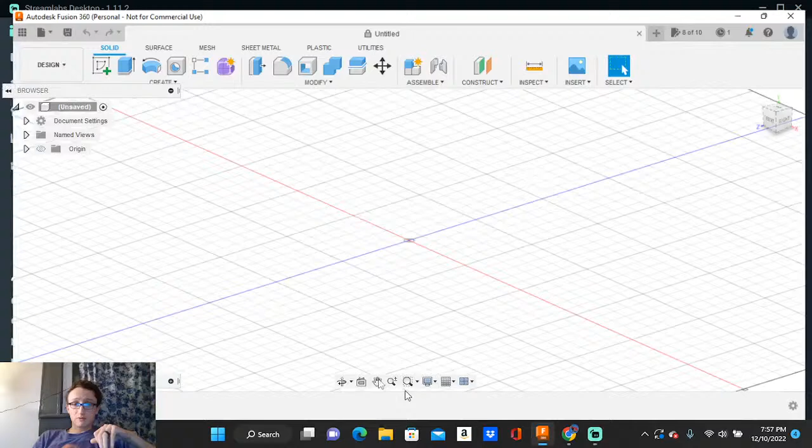We have a fresh file in Fusion, so I can go ahead and start whenever I want. I've got up to 2 more models I can make right now. I went by and closed off a whole bunch of other stuff just because there's a lot of stuff in here I wasn't using right now, so we'll keep that closed and start off with something fresh.

So starting off, I guess we'll go and get some reference images first. Let's look up a Federal Sign and Signal Q2B — let's see if we can find some good reference images.

Of course, everyone knows what a Q2B looks like, but we'll go off of this pretty much. There's going to be some design constraints that are a bit different, just basically inherent with the size of the siren I'm making.

I typically try to make my rotors about the same size. They're pretty much all the same size, with the exception of the Model 7T, which uses a smaller rotor than I usually do. But most of my rotors are around 40 to 50 millimeters in diameter, so we'll probably make this siren have about the same size rotor.

So the rotor's going to be about 40 millimeters, which, if you want to see what that looks like, I'll open up my calipers really quick and give you a visual. So there's 40 millimeters right there. That probably won't come through very well on camera since the screen you're looking at is so tiny, but there's 40 millimeters, that's my hand, about the size of a palm of your hand. So it's going to be relatively small, at least compared to the full-size version.

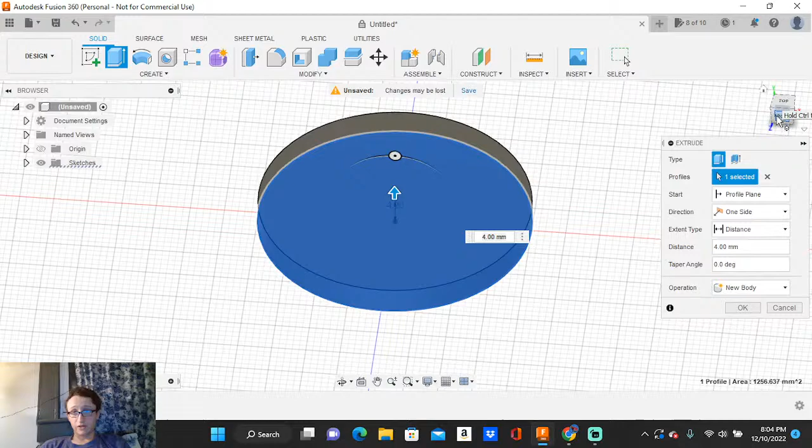So 40 millimeters right here. I guess we're just going to make this like a simple plate right now, so let's make this a quick little plate. 4 millimeters — that is really thick, I don't want it to be that thick. I mean, it might have to be just a little thinner.

I want a generally thicker rotor than what I'm used to doing, because I want the rotor to have some amount of weight to it, so that once the motor disengages it'll keep free spinning. I've got an idea of how I'm going to do that — I've got these really tiny ball bearings, probably won't come up very well on camera, but these are super tiny little ball bearings.

These were actually what I used on the miniature Chrysler — those are the bearings supporting the entire rotor and compressor section. So we'll do that. 40 millimeters seems to be about the size I want to go with, so we'll try that first, just so we generally know the shape we're working with.

Let me go ahead and make the walls of this. So 40 millimeters — we're going to make the wall thickness maybe about 2 millimeters thick for the rotor itself. We'll go in here, just come off, so 38 — this gives us our 2 millimeter wall thickness. Go up just like that.

Now the Q2B has a pretty decently deep rotor, so let's see if we can find a better picture of the side. There's a side profile of it, so it's got a decently thick rotor. This is not by any means a speed run, but I definitely want to try to do this as relatively quickly as I can, because I don't want to be sitting here for 4 hours designing this thing.

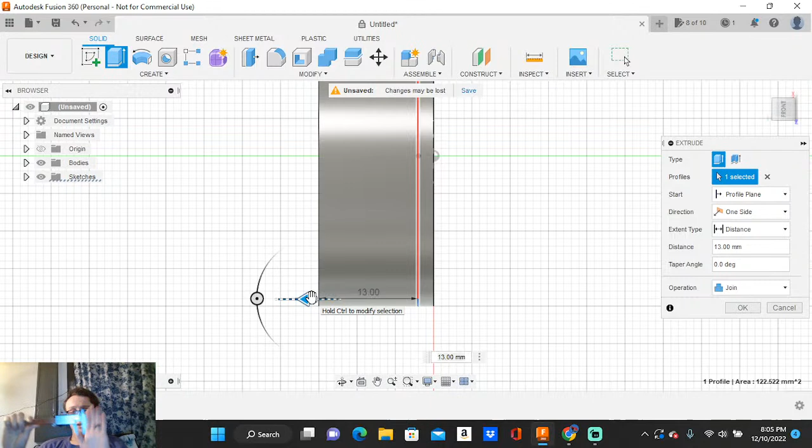Now 13 millimeters seems a little small, so we're going to do, I don't know, about 17. Well, 17 looks too big now. We'll do like 16 — oh man, that's going to be a real small siren. If I could make it 20 I would like to do it as 20. You know what, no, we're going to do 18. That'll be thick enough.

Alright, and again, as I said, I did make the walls of this just a little bit thicker than I would normally do, because I want to make sure this is going to have enough weight to keep coasting once it's done.

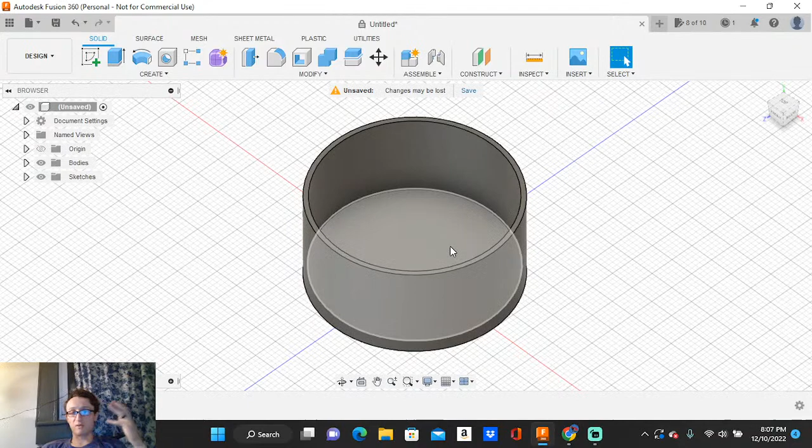The one thing that's going to be kind of a pain is because of how small this clutch has to be in order to fit within the siren, and also to be detailed enough to physically work, because I have to deal with the size constraints of what my printer can actually print. This is 40 millimeters for rotor sizes, and anything smaller in functional parts gets close to the edge of what my printer can print with relative detail. So I'm going to try to make this whole siren MSLA printed, using my liquid resin printer, not hard plastic filament, which can get a lot more detail. So we're working with that constraint, and I can probably get away with making things a little small, but I have to keep my tolerances realistic.

Chat is blowing up. My gosh, I got 8 viewers right now. That is crazy.

Let's see, Abel - I don't know how to spell it, but you're alright dude, you're alright. Sirens and fire alarms in Northern Florida - I make mini, sorry, mistype, Abel won. Bro, Morocco lost to Portugal. I didn't see that yet, I haven't seen the game.

Cool Sirens 1000T says, I'm going to watch your lives because I want to learn how to make these scale sirens. Of course man, that's what they're all here for.

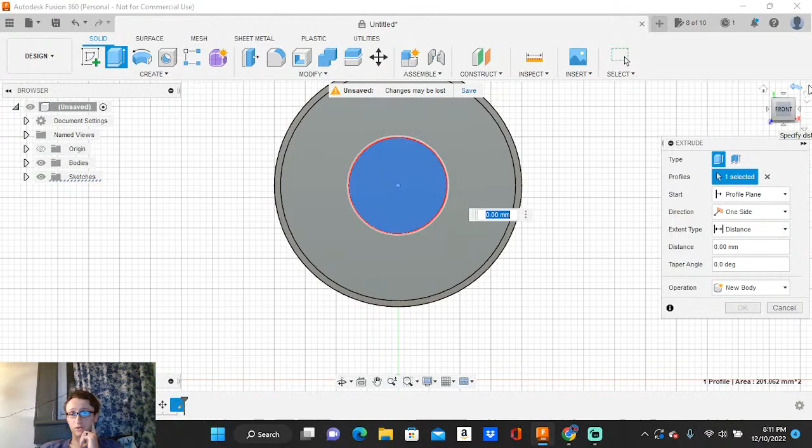Let's make this about, it's way too big. I don't need that to be that deep. Let's do 13 to make sure I have enough space.

Because these two bearings, I have to use two of these because of the lateral play in the bearing. Lateral play means, say if I have an axle going through this small bearing, let's say my fingers are the bearing and this is the axle. The bearing has lateral play, meaning the actual bearing itself can twist up to, I think, about 10 degrees in either direction because of how small the bearing is. They're just not made to super high tolerance because they're already so small. I have to account for that, so I can't use just one bearing, because the weight of the rotor, once it's actually inside that stator, is going to cause the whole rotor to sag on that bearing because of the bearing's play. So I'm going to have to double up the bearings, two of them side by side, and that will cancel out their play so it'll be nice and tight, making sure that rotor stays centered in the stator so it doesn't end up scraping, because especially at the scale I'm at, the tolerance between the rotor and stator is already going to be tight enough. I don't want to risk having the thing not actually lined up properly.

Speaking of which, there's a fire truck in the background.

That's because I live in between two fire stations. That's probably why you hear it so much. You can hear it in a couple of my other videos.

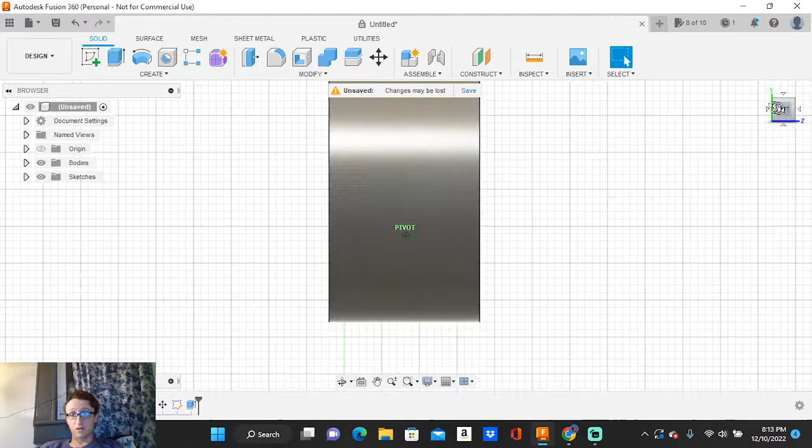I want to do a section analysis really quick so I can see where I'm at. Let's cut, I don't have a face to work off of, let's do that one. Alright, so I can get an idea of where I'm at. I have to try to find a way to fit that clutch into just this little space, which is going to be a real drag.

These bearings themselves, let me get a quick measurement, because this is why it's important to have a pair of calipers to know the dimensions of the stuff you're making, if you're using parts that aren't 3D printed. So my bearings themselves are 4 millimeters tall by...

There's no way that's 8 millimeters. Let me re-zero my calipers. Yeah, that's what I thought. Oh no, they are, okay, yeah, they're 8 millimeters. So 4 millimeters by 8 millimeters.

Okay, so 8 millimeters around, so we can go into here. We're going to hollow this out so I can make a space for the bearings. So this is 8 millimeters around. If I did exactly 8 millimeters, knowing the way this printer prints, that would be way too tight, they're not going to fit down there. In a perfect world, if I could print exactly to 8 millimeters, that level of precision, it'd be no problem. But the printer has its own tolerance, its own resolution, so I have to account for that.

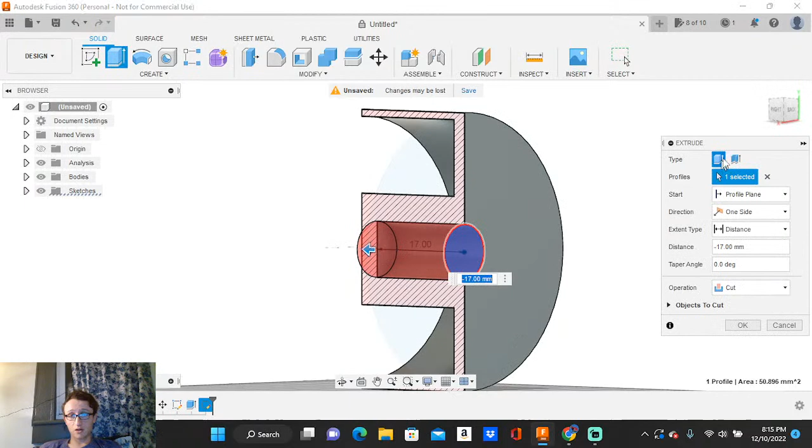It's probably going to be a little tight trying to squeeze the bearing down there. But I can make a press, like a little punch that I can print to actually force the bearing down this rotor. So we're just going to do that. I'm going to say that's probably going to be pretty good. So let's go ahead and force that all the way up to the front, make sure I have enough space to fit this bearing in there.

Let's make it, that'll be fine. That'll be fine. It doesn't have to be super precise. So it's a 1 millimeter wall right there, so we're going to cut that. So now that means this wall right here is 1 millimeter. Now remember, these two bearings doubled up.

I can also just make a model of like a dummy bearing to kind of give me an idea of how big it's going to be, give me an idea of what kind of space I have to play with. These two bearings doubled up are 8 millimeters.

So okay, let's just say I'll make another little sketch. We'll say that this right here, this circle, I'll make exactly 8 millimeters, and then make it 8 millimeters tall, because that's what the bearings are when they're doubled together. Go in here, add that dimension.

So let's say this right here is the bearings. So I have all of this space behind those to try to make the clutch. And that's the yikes part. That's going to be the really hard part.

So we're not going to join that, we're going to keep it as like a new body. We'll go in here and we'll start labeling stuff. So my body's over here, body 1, which is the rotor itself. We'll go in here, we'll just rename this. We'll call this the rotor.

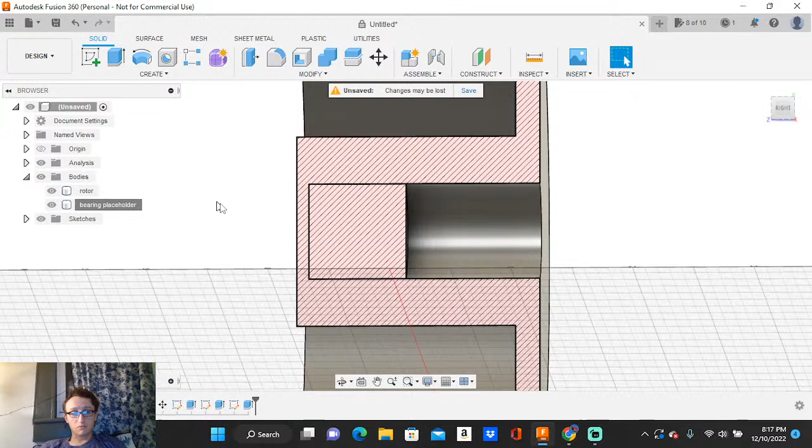And these right here, this is basically going to be a placeholder, so we'll call it placeholder. Or we'll call it a bearing placeholder, why not? Okay, so that's going to be a bearing placeholder. So then when I actually model this, that'll just keep it labeled there, so I know this is actually not part of the model, so that I can just go there and delete that. It's just so that this is basically a guide, so I know kind of where I'm going to be situated.

Go ahead and go back to the chat really quick. I'm going to try to read some stuff really quickly. Long Beach has Screenmasters, I saw that already. Sirens and Fire Alarms in Northern Florida. Screenmasters also in San Jose. Yep. The Ray 2009 in general. What is your favorite siren?

Man, you really put me on the spot there. My favorite siren, I like a lot of them. I know everyone's... I think a lot of people in the community, I think they're immediately gonna be like, 'Oh, I like Thunderbolts,' and I get that. Because Thunderbolts are a pretty unique siren. They're a really interesting one. But...

I still think it's probably gonna be either like Model Ds. I've always loved Model Ds. I know they're pretty popular. I mean, they're not super popular, but they're a pretty easy siren to get. But I've always loved Model Ds. So I'd say probably Model Ds, but I'd say second to Model Ds...

And really at kind of the point of being a real contender for my top siren, I would say is probably the 500s, probably the 500 SHTTs, specifically the very early ones. So like the 1950s models that you see in LA. I think those are probably one of my favorite ones. They're really up there for me.

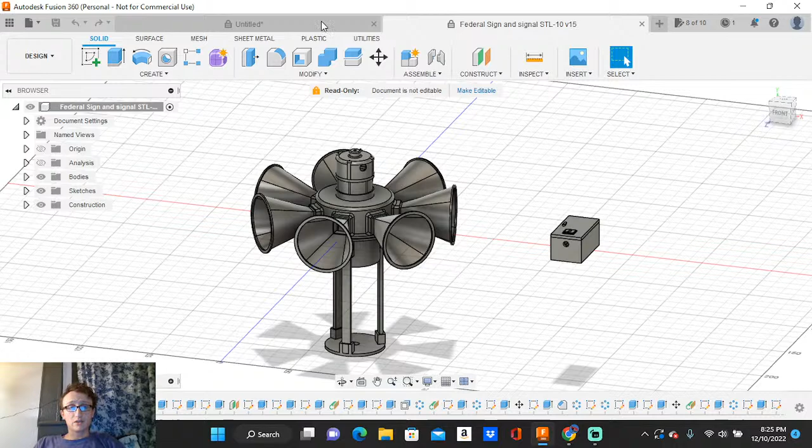So today I'm modeling one of these. I'm trying to keep it in that same scale, so it's trying to be really, really small. And of course I have the real ones too, not just little models. They're all stacked up over there, but I'm not going to show you my house, it's kind of a mess right now. But yeah, that's pretty much what's going on in the stream. So if you like 3D modeling or want to learn how to do some of this stuff, stick around, or just enjoy.

AJ, he's modeling a miniature Federal Q. Bitfinesse, Federal Q siren, AJ? Yes, a Federal Q. Every American fire truck siren now, at least. You might be getting a Model 2 from a fire department. Congrats, that's cool. Is it a 240 or a 120? It's probably gonna be 240 if it's from a fire department.

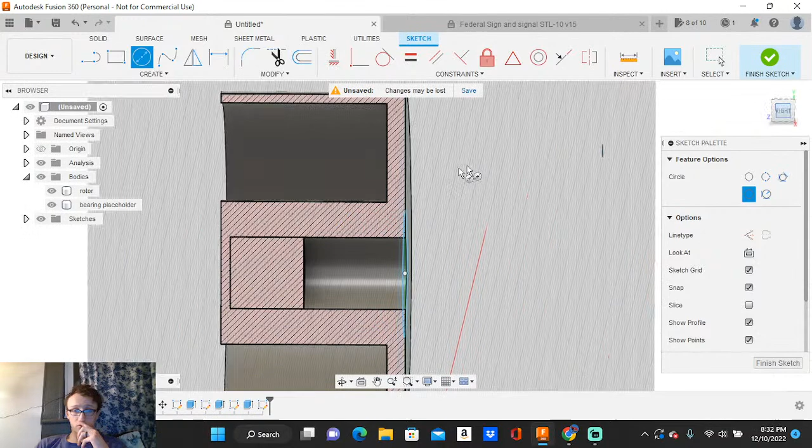So I think 2 millimeters, actually even 2 millimeters is too thin. It's way too small. Let's make it a little bit bigger than that. Let's go, I don't know, let's give it at least 3 millimeters. We'll give it at least an extra millimeter there.

So we know that's about 16 millimeters there, so we'll just do 13. We'll cut down to 13 there, go in here. We're going to cut out this ring, basically almost right up to the bearings, I think. So we're going to cut it about that deep, because I want to make sure I have enough space in there.

And I will have to put a spacer in between these bearings to keep the actual rotating section of the clutch off of the bearings, because I don't want it to rub against this.

So, you know what? No, you know what? Let's go flush with the bearings. Let's go flush with the bearings. So this is all the space I have in here to try to model a clutch.

You know what? Since we're here, let's get rid of the rotor. Let's also go ahead and cut the hole for the bearings, just so I remember what size it was. I think these are like 3 millimeters inner diameter for the bearing. Let me check my calipers again really quick. Yeah, 2.93, so that's within tolerance. They're 3 millimeters. So we'll just say this is 2.93, so 3. I want to make sure I'm staying within tolerance.

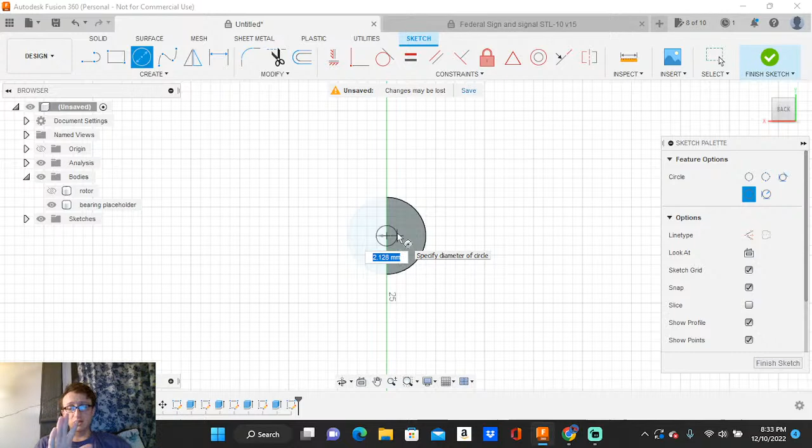I gotta make them a little bit bigger. No, I don't. No, this can be an exact tolerance, because this is fake. This is pie in the sky woo-woo magic if everything was perfect, because everything is dimensionally modeled perfect in Fusion.

It's only when you bring it into the real world that you realize the real world is out of tolerance all the time. So let's go ahead and cut those holes for this bearing. Let's just say that's the bearing right there.

Go ahead and do an offset plane. Cut it halfway through, so they're 4 millimeters deep. We'll do it so it looks more like 2 actual bearings and not just this little space. So let's say that about that.

Go here, split this - splitting tool, this face. There we go. All right, and now I gotta make sure that goes away, because that's right where I don't want it. So make sure that plane goes away.

All right, so now I have our 2 bearings, so we can kind of get a bit of a better visual as to where these things actually are sitting. So now this is the part that I'm going to be kind of interested in how I'm going to do it.

Again, let me go and kind of describe what I'm talking about here. So let's do a pawl clutch...

And see if we can find one. Paul Clinton, that's fun. Or Paul George. No, I'm not looking at that. I guess Paul clutch - that's not who I'm looking for. Oh, I'm an idiot, I spelled pawl wrong. There we go, there's a pawl clutch. I spelled pawl like the dude Paul.

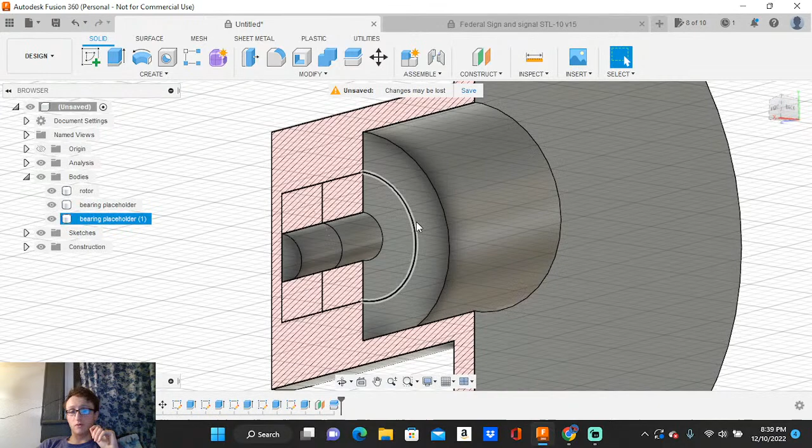Okay, so we're going to try to fit all of that in here. Let's see if we can do that. Now, I'm not going to bother trying to model the rest of the rotor. That's all pretty easy stuff, I've done that a thousand times before. That's not the hard part here. The hard part is getting this clutch small enough to fit in this little tiny space, and making it durable enough to last specifically for customers, people that are going to be purchasing this.

Shout me out on my basketball skill. Yeah, for those who are wondering, Able Wrestler 1 is my younger brother, and he's a basketball player playing in middle school. I'm hoping I can get to see one of his games when I go back to California. But yeah, this is basically a brief little look at that. So we kind of know what we're going to be working with.

So let's see if we can do it. I don't want to actually be constructing this inside this right now, so let's go ahead - this is going to be in my way as I'm trying to model this. So let's go ahead and make an offset plane, put a plane right there so I've got something else to build on. And then let's get rid of all of this noise here, so we have a nice clean slate to build on.

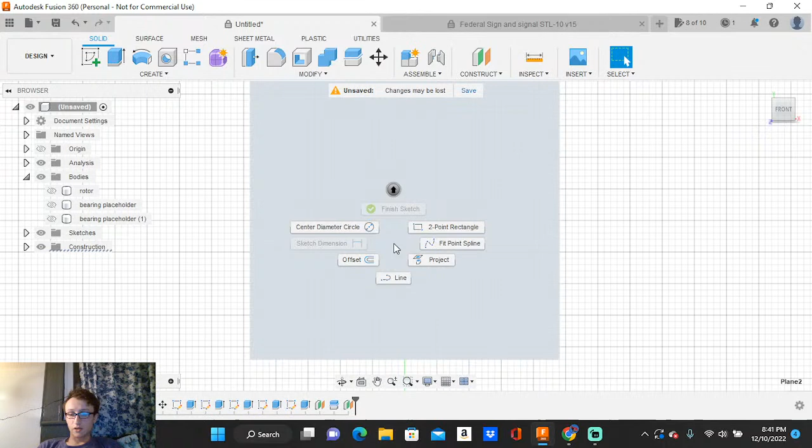So I guess we'll start with the clutch, how we're going to do this. So these motors rotate clockwise from the shaft end, so let's take that into consideration. We're going to put our little circle here. Let me make sure this lines up with the rotor - does it, right, make sure it's concentric. Yes it does. Alright, so I don't have a lot of space in here. Let me bring back the rotor.

Yeah, let me do another section analysis really quick, actually. Go away, man, I don't want this. Go away, sketch, thank you. Okay, let's do another quick little section analysis. I'm just going to finish this sketch, just so I can see kind of where I'm at.

How much space do I have? Yeah, let's do that. So I'll do another section analysis, just to get an idea where I'm at. You might hear my cats screwing around in the background, just be aware.

We went ahead and put a construction plane, so I've got something else to build off of. Let's start trying to make the actual clutch itself. I want to make sure there's enough space for the pawls to fly out and actually grab the rotor, but also close enough that they don't continue to rub.

I think 11 millimeters. The inside of this is 13 millimeters. If I make the wall, the actual pawl itself, 2 millimeters deep, that gives 10 millimeters. 10 seems a little small, but it might work, giving plenty of space for the pawls to fly out. It's just a 1 millimeter difference, but it makes all the difference once you get later down the road in the model.

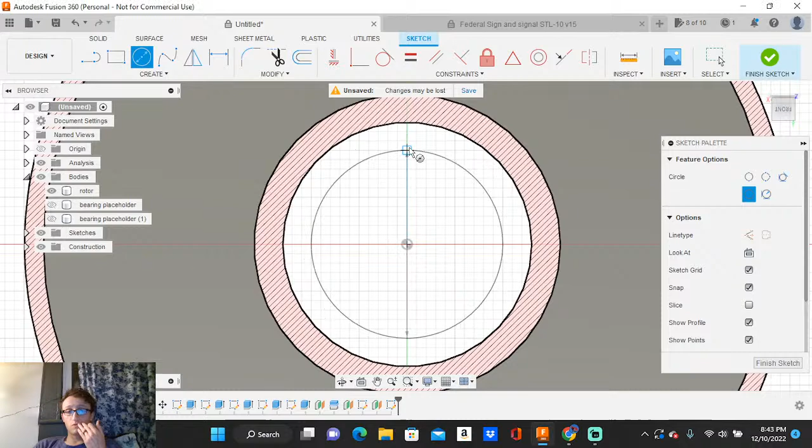I'm going to go with 10 millimeters. That leaves quite a bit of open space inside there, but we'll deal with it. Okay, so 10 millimeters there.

Let's go ahead and give this some volume here. Let me get rid of that section analysis because I don't want to see through the whole thing, but I do want to see through the other side, and we'll see how deep we make this. It's going to be kind of a deep clutch. Add our bearings back so I can see where I'm at. I think that's pretty good.

We'll get a little closer to the bearings. I'm going to put a little lip on the actual rod that comes out and holds onto these bearings, to make sure the whole thing stays off of this face, so that the spindle of the clutch doesn't keep rubbing on the actual rotor itself.

So there's about half a millimeter there, we'll leave that as is. Then we'll come back inside and add the little pin that's going to hold onto those bearings. Now it went away, so I can't see it. There we go. And how big were those bearings? Those were 3 millimeter inside diameter.

The clutch itself is probably going to have to be printed out of PETG. Those are wailing sirens in the background, the cop cars. So this is going to be PETG printed. I want to use PETG for this because it's more flexible than resin, and I know it'll be able to flex out there and make contact. So let's use PETG for this.

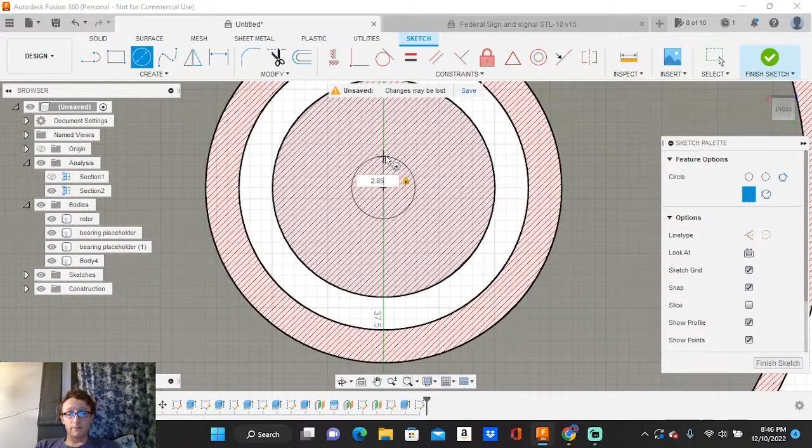I have to remember that the PETG tolerance is a bit different. PETG tolerance, I think, for this kind of stuff is usually about 0.15 millimeters over whatever size is measured, while MSLA is 0.5. So if this is 3 millimeters, I have to go 0.15 millimeters in from that, so 2.85. Make the shaft 2.85, which should be the perfect tolerance to fit.

Oh, hold on, I have to do this first. I have to make that little lip I was just talking about. So we'll come back in, go off of this, sketch that circle again, and make it just a little bit larger, just to keep it off. So 3 millimeters, let's make it 4.

So 4 millimeters there. Come up off of that half a mil, because that's the size we're using, which gets us right up against that. I know it looks bad, but trust me, it'll work. We do not want to join those together. Make sure you pay attention to that kind of stuff, because Fusion will go ahead and weld stuff together if you're not paying attention, and it'll screw you later on.

So we'll make that size, get a little bit of a lip, then make this center section again. Get my analysis back. We're going to make that 2.85. That's 2.86, you moron. Go back. There we go. Alright, so now we can pull that sketch out, get rid of our section analysis, and get the section analysis back.

This is going to be the pin that slides onto those bearings to actually hold it on. I don't want it to go all the way to the end, because if it does, it's going to hit the front cap of the stator or the rotor. I might also add a little hole on one of these sides so you can get in there and oil the bearing if you ever have to. But we'll just join that together now.

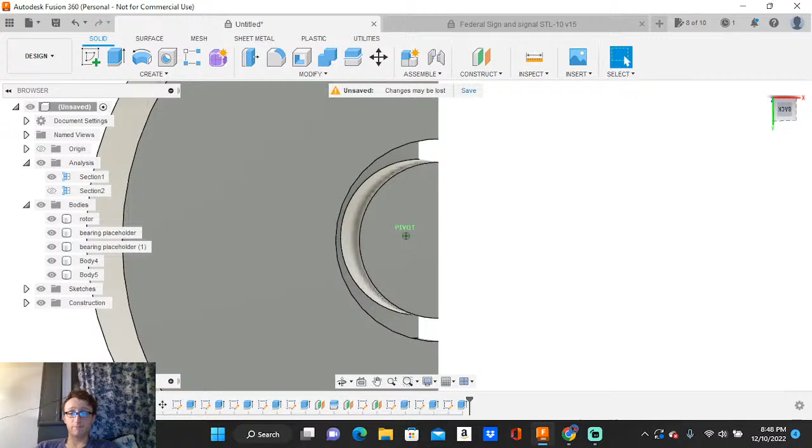So now we have essentially the root of the clutch. Alright, so now this is going to be the hard part, which is how the hell am I going to make this?

Let's get rid of these bearings, get rid of the bearing placeholders. I don't need the section analysis now, so get rid of that. Here's the drum, this is basically going to hold all of it. Why is my STL-10 still here? Get rid of that. We're going to make this drum, so let's see how we're going to do this.

Because this motor spins pretty fast. These are the motors I use, they're RM130 motors. If you want to look up what size they are, they're little RM130s, and at 5 volts they spin at like 9,000 RPM or something insane. Yeah, I think it's 9,000 RPM. They're quick little bastards, but we'll go from there.

So the center hub of this, since I know the motor shaft is a 2mm shaft, so 2.15 - don't ask me how I remember that, I just do. That's the tolerance I know I have to work with when making FDM stuff. I'm going to add that back so I can see how deep I make this hole, and then I've got to measure how deep the motor shaft is.

And the motor shaft is - wow, there's a lot going on Main Street right now - motor shaft is about 7mm, yeah, about 7mm.

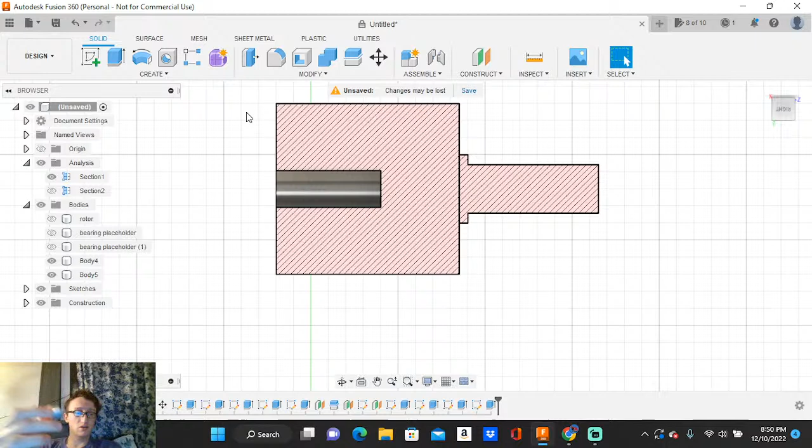Am I still bleeding? Man, I don't know what I did to myself. I must have caught myself on something.

So make that 6mm. This whole thing is going to be kind of dangling off of the front of this motor, so I have to be very careful to make sure this is centered correctly. I might even have to make this MSLA printed just for it to work properly, which I don't want to do, but I just might have to.

Alright, so this is going to be kind of just a freehand thing, so let's see what I can do. Let's start out with doing some fit point splines, let's do some splines here. Actually, I want to set up some kind of barrier here - let's go from that center point down to the bottom edge, just so I have some kind of compass rose lines here, so I can have some very accurate places. I have to make sure this thing is balanced, it's going to be spinning so freaking fast, so let's make sure we've got some points here to work with. Let's say about right there, that's fine.

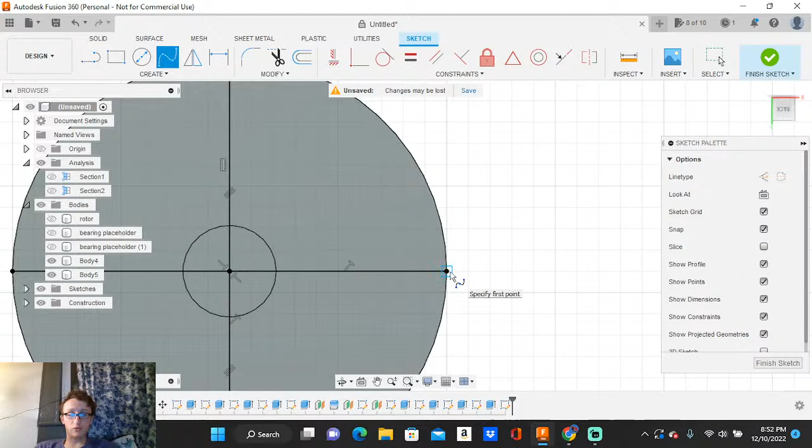So I have to make this section down here kind of thin. Apologize guys, give me a second to figure out how I'm gonna do this, because I've got a lot of space. I got a gap too. There's a lot of space I gotta worry about. Yeah, that's a lot of space to deal with.

Because there's the actual rotor itself right there. I can add the poles to the rotor, no problem, that's not the hard part. The hard part's just making this clutch kind of work.

Now I want to make the inside of this reasonably thin, but I want these to be long enough that they're gonna want to fly out when the motor gets spinning really fast. So let's try to make this structure right here off of this one line. We'll go, I don't know, like half a mil in.

Yeah, about half a millimeter in. So that gives us a point we can actually base off of right there. And then we'll go up from there just a little bit, just to give it something to work off of. This is going to be a lot of the fine tuning kind of stuff here.

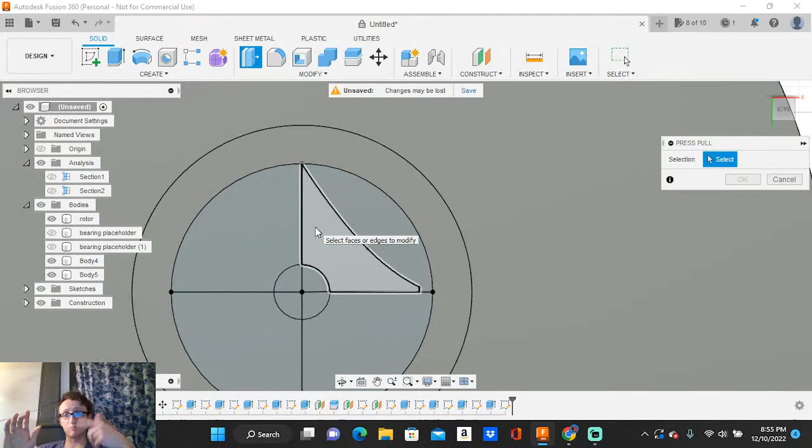And I do want to keep the actual rotating mass of the clutch itself kind of low, because I want it to slow down once I cut power to it, so that it lets go. So I don't want this to keep spinning and keeping those pawls out, because then it'll stay engaged. So I want to make sure this doesn't stay like that.

So let's go ahead and add another fit point spline. We'll add this spline just a little bit lower, basically to cut this section out. Just give me a little bit of a gap here. Let's just do right there. Yeah, and then it'll bend away from that as I move.

Sweet, how big did I make that? I made that like a 1 millimeter square, or a half mil. So from there, we'll go right there. Yeah, and then we'll draw a line and connect that to there, so that I can cut this little section out now, and that'll give me one of the little pawls. So if I go here, go in, press pull, I can now cut that section out.

So I basically have the edge of the pawl now. The problem is that gap might not be big enough. When this printer prints, you have to worry about the tolerance of the printer, and this is going to be printed using the FDM printer. So this is the hot molten plastic, and when it's laid down as the first layer on the bed, it tends to flow out. It creates what's called an elephant foot, it's just known in the 3D printing industry. That elephant's foot is going to end up closing up that little tolerance I just created, unless I make sure this is actually wide enough to compensate for it, to make sure it's not going to scrape on anything or basically weld the whole entire thing shut. So I might have to make that a little bit bigger.

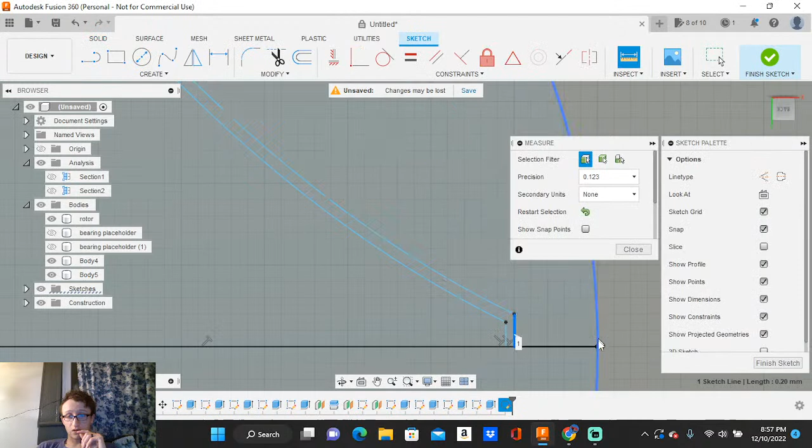I want to pull it out first and just see what it looks like. And I think that even that's probably still too thick. Let's see how thick this is exactly from edge to edge. Half a millimeter. I mean, doesn't seem that thick, but even looking at it, it looks really thick. Let's do half a millimeter, see how big that is. That might work, actually. That's pretty thin, but it might work.

Alright, I'm going to have to cut a little relief edge here, about like this, just to make sure this is actually going to have enough room to have a point to flex on. So that is really, really small, but we'll see if that's going to work.

How far is this edge from itself? Ooh, that is really tiny. That's probably going to be way too small. It's 0.2 - wow, that is so small I can't even see it in the calipers. That's okay, that's way too small, so we can't do that. That's not big enough of a relief edge or open space.

So we're gonna have to make that a little bit bigger than that. That's no problem, I just showed you how I did it. So I was gonna go back in here to find fit point spline again. It would probably help if I actually gave myself some lines to work with. So we can do about half a mil again - do 0.5, so make half a mil of a gap. My printer should be able to print that, so that should be no problem.

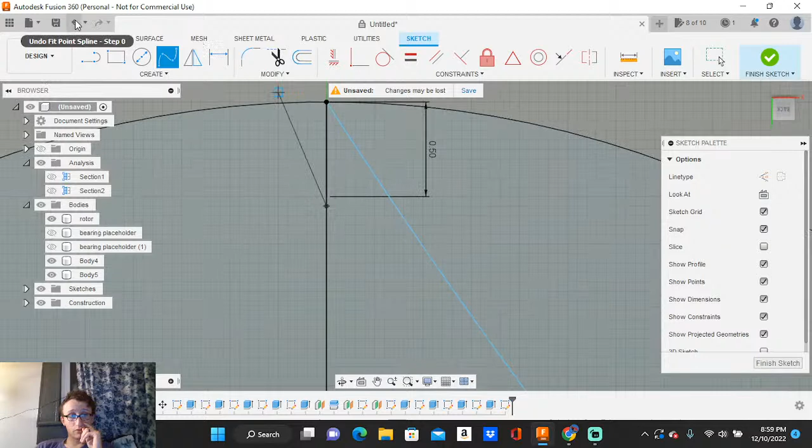So half a mil there. Where's my little guideline I just made? There's the square - no wait, no, that was not the square I was on. There you are, okay, so we're going to do that. Come down, how big is that? That's about 1, 2, 3, 4, 5 squares. 3, 4, 5, right there.

That doesn't look right, that doesn't look right at all. Maybe it is, I mean, in other words, it doesn't have to be perfect. So we'll just say it's that, whatever. That will at least give us some kind of space on here. Yeah, that'll give us some space. Let's say right there, why not?

Okay, so now can I cut this out? Sweet, okay, I can now. I do have to make that relief edge again, so I have to continue on with that. I wasn't done, because when I backed up to fix what I just messed up, I ended up creating another problem. So we'll make this go down about another half a mil, just to give us a bit more space for this whole thing to flex on.

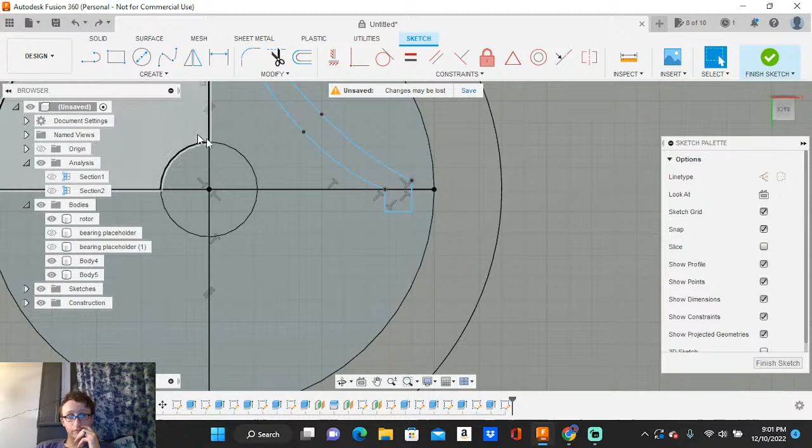And that pawl is pretty sharp on the other edge, which is perfect, so that's what we want. I might have to make that even longer. I have to make sure this is going to be flexible enough to actually open, because if this plastic is too strong, it doesn't matter how fast I get the motor spinning - the centrifugal force is not going to be strong enough to make this whole section actually fly out and reach the edge. So I might have to make this a pretty long relief angle, or little relief area here.

What are you doing? There we go. So let's make that generously long enough so that this should work. God, I hope that does. That's going to be a lot hinging on that one little spot down there, but that should be pretty good.

So now we'll go - where did you go away? There you go. Now I'm at the point where I'm just kind of talking to myself, so bear with me for a sec. Make sure that goes away, and then I should be able to go along and actually cut that entire edge out, if I cut just like that. Why are you still connected at the top? I didn't want you to do that.

Now I'm just kind of making myself angry. I want you to be open at the top. Why were you not open? I'll just make a little thing here, this will be pretty quick, just so it's open right there.

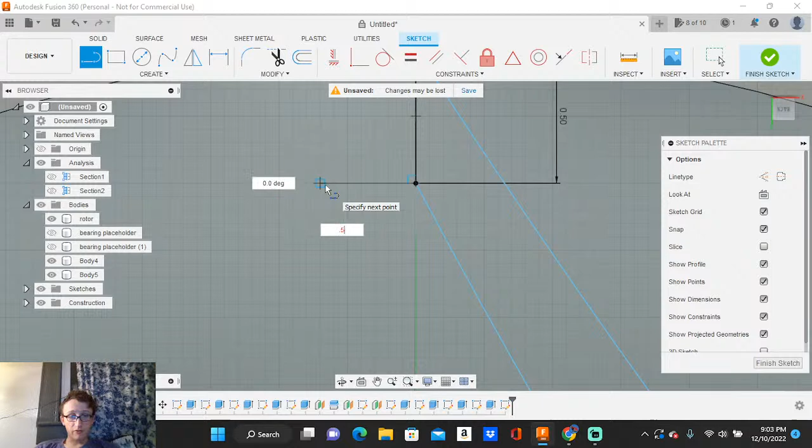Make it go over... whoa, not 5 millimeters. Not 5, 0.5. No, let's make sure we do that again. 0.5. Thank you, okay, go back to that edge.

Alright, so now when I press this out, I'll make sure I actually press that out too so it won't be joined. Man, what is going on Main Street right now? There we go.

Should be able to cut that whole thing out, and now we'll have the space. So we'll cut that. That looks pretty good, but it would be unbalanced at this point. So this is where we have to go in, and we will do my favorite thing, because it feels like a cheat, to be honest.

Go to our section analysis, and I should be able to highlight that whole entire thing, kind of, and then just select an axis, and then it will basically, whoa, we're not adding 10, we're not adding 9, we're doing maybe 4, if I can get lucky.

I don't think I am. I think even 3 would kind of be pushing it. Let's see what it looks like with 3. That could work. That might work, actually.

That keeps it really light. There's not a lot of mass in here, which is good. So it keeps that whole thing pretty light. I could honestly even come in here and actually cut some holes and make this even lighter than that, because again, we want this whole clutch section to be as light as possible, because we don't want it to stay engaged.

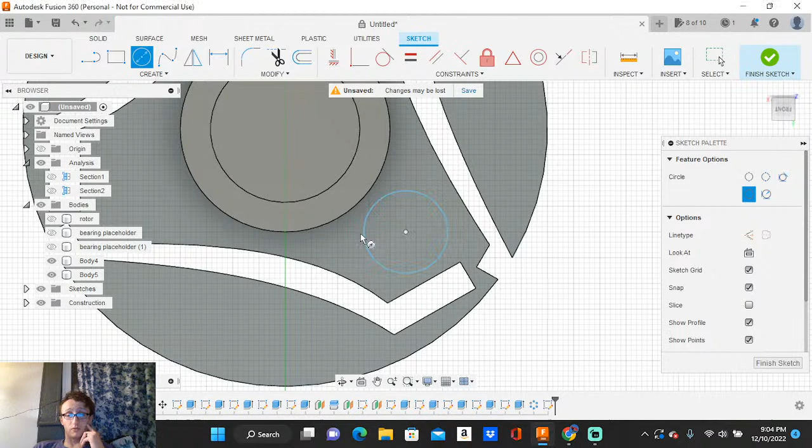So I can see if I can go in here and cut just a little hole. Yeah, sweet. I mean, it's like 1 millimeter, but it's weight reduction. So we'll cut one little hole, let's see how that works.

Along that edge, cut that. Now, am I going to like that, or is that going to end up biting me later on when I find out that this is too out of my tolerance?

And do the circular pattern again, come back in here, select that hole, go into axis, just select—I'm not doing 8 of them, or 10 of them, let's do 3, like it was before. So 3 of those. There we go, and there is the center of our clutch with the included weight reduction holes.

Try to keep the weight down again. That looks pretty good.

I'm not too fond of compliant mechanisms in 3D prints because they typically don't work very well. Again, because of cycle life, they don't like to be cycled very frequently, and I'm kind of concerned that this is a really close gap right here. That's really close. I don't think the printer can even model that.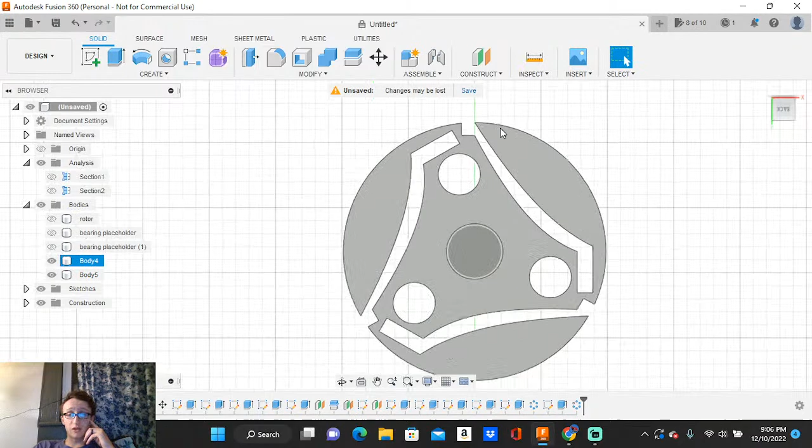Yeah, how far is that? 0.2. I don't think it can even model that. But you know what we can do? Because of the magic of having a 3D printer and having the software to do it, I can come in here and we'll check really quick and see if this is even going to match up.

So I'm going to select this, select 3D print so I can actually see what it does. Why isn't this connected? Why aren't you connected? For some reason, the actual support for the bearing wasn't actually tied into the... there we go, that was dumb.

Alright, so now I can take the whole thing. Let's go ahead and export this. Let's just do—this is another thing I'm working on right now. Let's do clutch, I'll find it again later, but let's go out here. There's a compliant mechanism. And there's Streamlabs.

Wow, I've been doing this for an hour already.

Alright, let's see if I can—we're going to read some of the chat really quick. There's a lot kind of going on. My throat is so screwed up right now. Okay, back where we were.

Favorite sign in journal, I already answered that. Do we own any fire alarms? Yes, I do, I think I talked about that just briefly a second ago. But I do own a fire alarm. I have one, I'm not really super big into fire alarms, I will admit, so I really don't have a lot of them.

I have a P2R strobe with a candela selector in the back. I'll probably do a video on it later, but I'm not a big fire alarm fan. There are people who know way more than I do, so I try to stay out of that. I stick with what I know, and that's sirens. I found this P2R on top of a roof when I was working, and it still works.

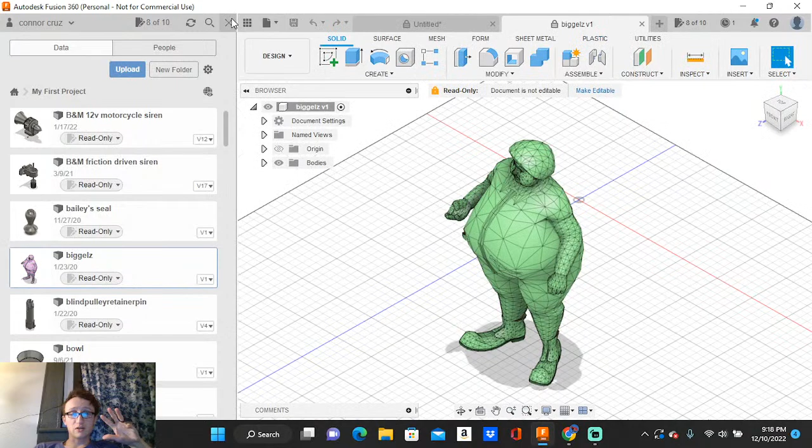I'll show you really quickly. There was a model over here somewhere of a little fat clown - a long inside joke of my friends. His name is Biggelz. Where's Biggelz? Biggelz is hiding somewhere. He was modeled using SketchUp, and SketchUp just does not like to try to make that kind of stuff.

There's a fat little clown, and you can see it adds a lot of polygons. I don't know how Blender works really that well - I haven't used Blender in so long, and I never actually tried 3D printing anything with it. So I don't know, you can try it, but yeah, there's Biggelz. It's a weird tangent.

But let's get back to it - my whole thing is I want to see if this printer is even going to be able to model this little tiny gap in between here, because it's really, really tight, and I'm kind of afraid it won't be able to do it.

The Ray 2009 asks, what's your favorite siren? What's your favorite siren in general?

Considering I now have a total of four Model Ds - I got two really badly beaten down Model Ds from eBay a while ago, and I have two very old Federal Electric Model Ds, which I love because they're the ones with the larger motor, the Dimpleback Model Ds. So now I have three Federal Electric Model Ds, plus one Federal Sign Signal Model D from like the 50s. I think Model Ds are probably still my favorite, because I have the most of them. I've got four Model Ds, two Model As of both generations, the CSM7 C5, and the ED Bollard, the little 6-volt ED Bollard.

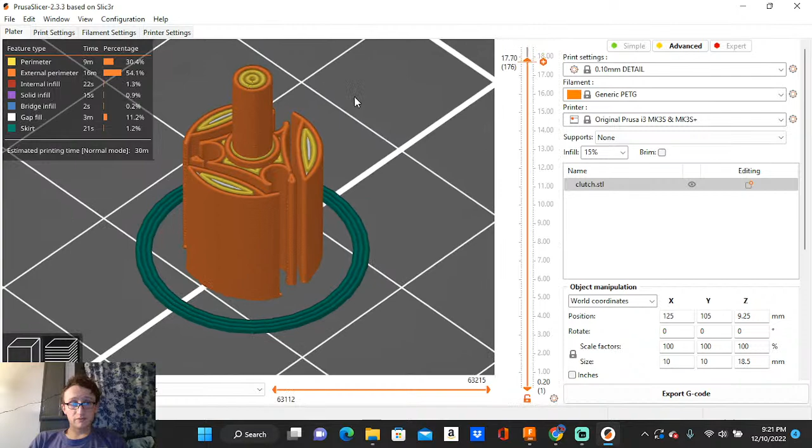I don't think it'll even be able to do that. Let's try, let's see if it can even print that. Yeah, that's what I was afraid of - it can't even model it because it's just too thin.

Okay, well that sucks. Well, let's see if... man, I might have to model it with the MSLA printer. I really didn't want to, but I might have to. I might not have a choice on this one.

Let's see if it can even model on the other one - it should be able to. Let's see if it works for the MSLA printer. I hope this doesn't spoil it, because usually it opens up stuff I was already working on. Okay, good, it didn't spoil what I've been working on up here.

Let's see if I can put that in there and see what this looks like when I slice it. Wow, it actually placed it on the build plate correctly too. Let me slice that really quick - was it able to do it? It might have. Holy crap, that is really small.

God, man, that is tiny. Wow, there's a lot of artifacts too. I might not be able to do it with 3 wings. I might have to do it with just 2, because that eats up a lot of space.

Yeah, that eats up a lot of space. I might not be able to do that. That's gonna be a long print too. 44 minutes—I think it was only a couple minutes with the Prusa, if it even tried. Yeah, 30 minutes. Oh well, I guess that's long too, actually.

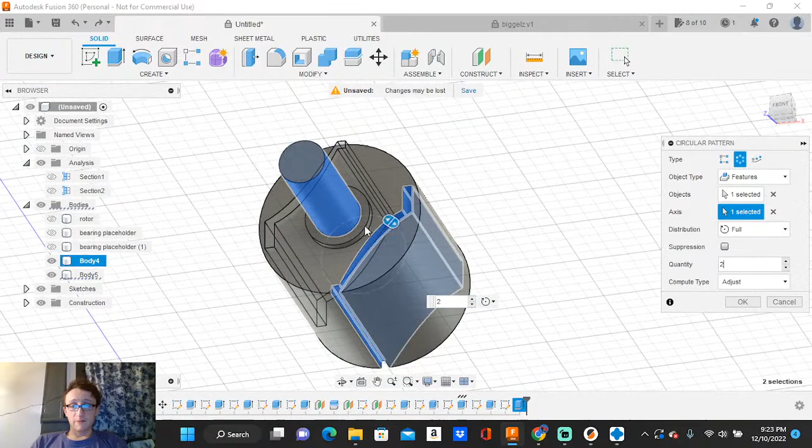The only other reason why I don't want to do just 2 is because if one of these engages and the other one doesn't, then it will lead the whole thing to be out of balance when it's spinning, especially if it's going to be spinning at like 9,000 RPM. I want it to be pretty balanced.

Let's see. Let's see if that works. Let's see how that... no, that looks alright. Let's sketch another hole—we'll cut out some more space.

Man, that was really a treat having Tyler come into the chat. I appreciate that, Tyler.

Okay, go ahead and make that. No, make that model over here. Pattern—circular pattern. I'm just going to put that on the other side. Just 2.

Yeah, there you go. Okay, let's try that instead and see if it's a bit thicker, and it should be able to do that, no problem. If not, if this edge right here is still too small, I might have to just change this relief angle a bit more, just to give it a bit more space to work with.

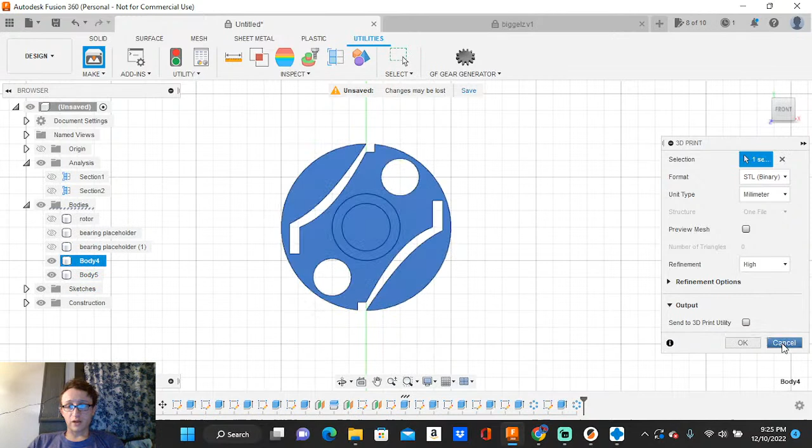Because I don't want it to snap right there. So again, I want my sirens to last. So of course I'm gonna test them out and make a prototype first, but I want to make sure it's all working properly before I get them out, because I don't want them to work for a couple days and then end up snapping the clutch or something like that.

Yes, replace that. Okay, go here. Let's see if I can put it in there now. Okay, put the clutch back in there.

Slice—probably still can't get it. Yeah, the Prusa still can't quite get it, even at the super high detail setting. That's just too much. That's just too much.

But I know it's not going to work with the MSLA printer. It's just not flexible enough. This is a pretty rigid filament—or a pretty rigid resin, I should say. So this is not going to work.

So I have to make this... what can I do to make this work? What can I do to make this work? Okay, I need to get off of that. This thing is wigging me out, seeing it just sitting there gyrating. Let's get away from that.

Alright, go back to Fusion. Alright, so this is going to have to be just a little bit thicker than that. Let's go back to when I was actually sketching that. Make the rotor go away. Oh, there's the sketch—it was on the back side.

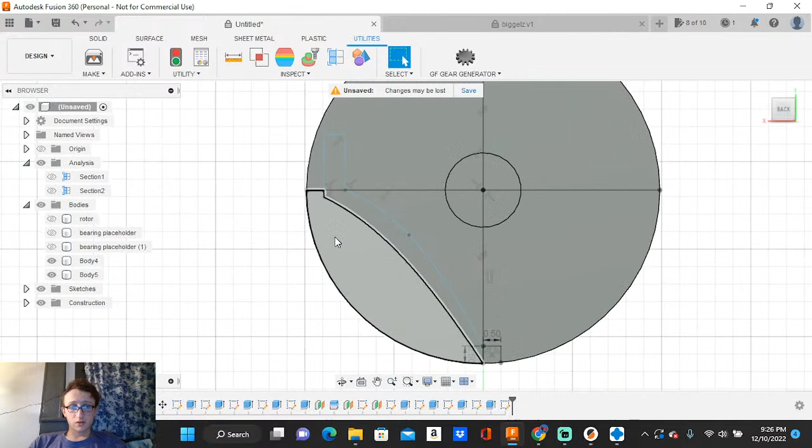Okay, so let's not press pull that whole thing out this time. Let's actually just give us a bit more space, just to make this hopefully stay closed. Okay, that should be good enough. Do that.

Get a circular pattern, make this a circular pattern. Do this one as axis, make 2 of them, not 3, because I think 3 still cuts over a little bit too much. Actually, it might not anymore. No, I'm just going to go with 2—I don't want to deal with it not cutting right.

Alright, so now let's see what that looks like. Update that. Yes, update it.

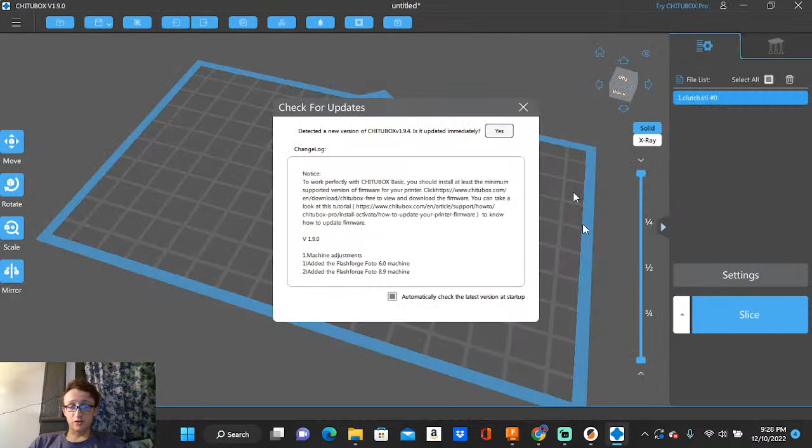Oh, you stupid... I hate that it does that. I don't know why Chitu likes to just impose itself on me, and it thinks that it's a Q2.

It tries to open it with Chitu every single time. Okay, let's slice that. No, they're still not making contact. This little gap right here. I need these two to be touching each other.

Let me think. What if I move it further back in? You guys are now currently learning with me, seeing the kind of process of how it goes into making these sirens. There's a lot of tinkering in order to make them work right.

I think what I'm going to do is move this edge a little bit, move it further away from the edge of the actual circle itself so we can just make this work right. Yeah, sure, on that, whatever. Let's do this. Let me get rid of this so I can actually see what I'm doing. There we go, okay.

Yeah, let's move this over a bit. Let's see if I can... No, come on, line up with this, please. Thank you.

Yeah, let's see if we can do that. Let me add that back now so I can see. I know these lines are probably really, really hard to see, and I apologize.

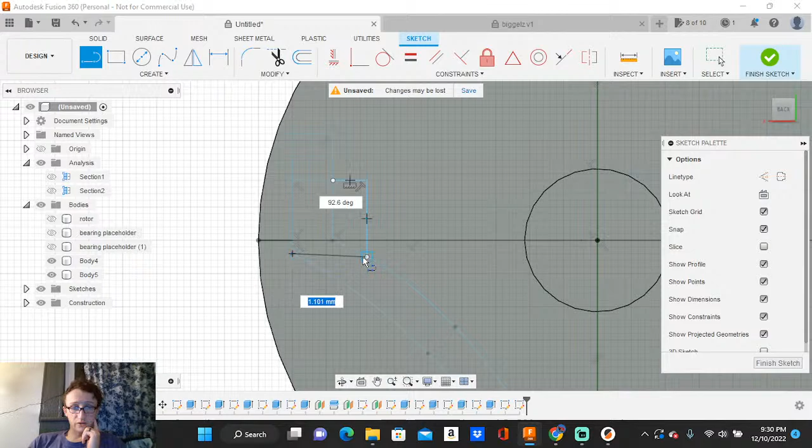Actually, realistically, you could probably just cut just that. Yeah, let's try just that. And just not even give it a relief at all. Yeah, let's try that.

Okay. Whoa, there's only one of them. I gotta make sure there's two. Okay, two, there we go. Do the same thing again.

Update that. Yes, it exists. I'm just going to update it. Clear out this garbage.

Okay, and slice. You still don't want to... Oh, there you go. There we go. Now it's connected, there we go. This is why it's important to check that it's actually going to work before you try it.

So that's cool, so that lines up. It looks like crap, frankly, because it's so small. But that's kind of just... Why are you hollow? I don't want you to be hollow, I want you to be solid. Okay, make you solid.

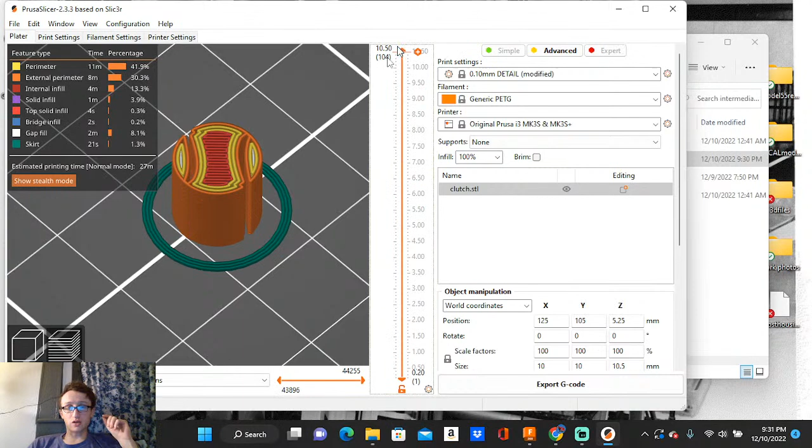It's honestly so small that I doubt I'm really going to have any issues with it spinning down too slow, so I'm really not that concerned about it. Now that I see realistically how small it is on the print bed, because it is really small, I think we'll probably be fine.

Yeah, how long are you going to take to print that? 27 minutes? That's not even that big of a print. Okay, let's go with that and say that's going to be kind of our base here.

And I need to combine this again really quick. Combine that and that, there we go. So then that's one part, thankfully. So I'm gonna stick with that, I'm gonna call that good, just like that.

Of course, I'll print it twice. So I'll print it in PETG, and then we'll also print it in MSLA, and we'll see which one works better.

I think right now I have this sized for FDM. So that's sized for FDM. This rod right here should be sized for FDM as well. It should grip those bearings tight enough so that the rotor doesn't slip off of that motor shaft. So this should be pretty good.

Okay, now our rotor's right there. Okay, this is a really, really, really small clutch. I'm hoping that it's not going to have a whole bunch of force put on it.

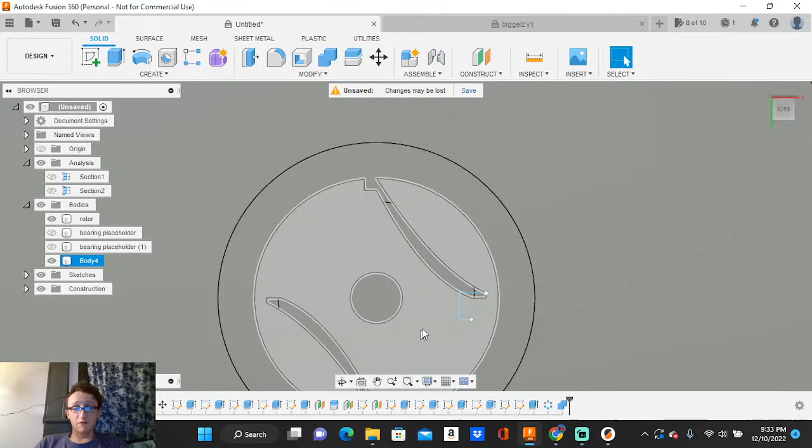Alright, so the direction of the clutch is going to be spinning counterclockwise from this direction, but if you're facing it from the front, the clutch is going to be spinning clockwise. So I'm going to have to make sure I design the vanes to be facing the right direction. So let's get rid of the actual...

Okay, we'll call this the clutch pawls. And then we'll just get rid of it right now because we don't need it.

And is the sketch still there? It left the sketch, what are you doing? Why'd you leave the sketch? Get rid of the sketch. There we go, okay, so I know we're just looking at a blue circle now.

So where am I? Okay, there we go. So now I have to make the actual teeth that are going to be sticking out, that are going to be actually grabbed by that center section when they fly out. So now it's kind of a little bit of a dance trying to model these. So let's go and do a construction plane, tangent plane.

Okay, so we're going to be modeling it right here. This is where it's going to get to be a pain. We're going to model, start sketching right here. Let's just start off with some lines. Oh, that's really annoying. Let me do a section analysis again, because that's going to be a real drag if I can't see what I'm doing. There we go.

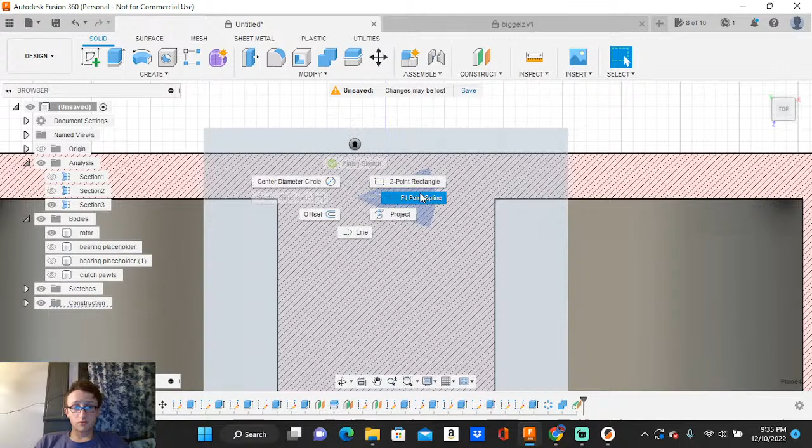Okay, so let's start making some pawls here. So, sketch, line. And I know that goes down pretty deep, so we're going to go probably about right there.

How far does this whole thing actually go in? Yeah, like I said, it's pretty deep. So try to, this little, oh, you can't see what I'm pointing at.

And of course I can't point with the cursor because it'll move if I move the cursor. But there's a, if you notice when I line this line up, there's actually two little dashes. They're kind of right at the end of where it says specify next point. There's those two little dashes that are actually on the line I'm drawing. That just lets you know that line is parallel. So if I move it off and it's no longer parallel, it just basically lets me know I'm parallel with this edge. So we'll go from there.

Is that right on that edge? Yes, it is. Cool.

I should be able to open two section analysis at the same time. But it doesn't want to allow me to do that, which is annoying. Why won't you let me open both? I would love to open both, so I can just chop this whole thing up and kind of see what I'm doing. But it doesn't want to let me do it. So that's annoying. That's a feature you should enable, Fusion.

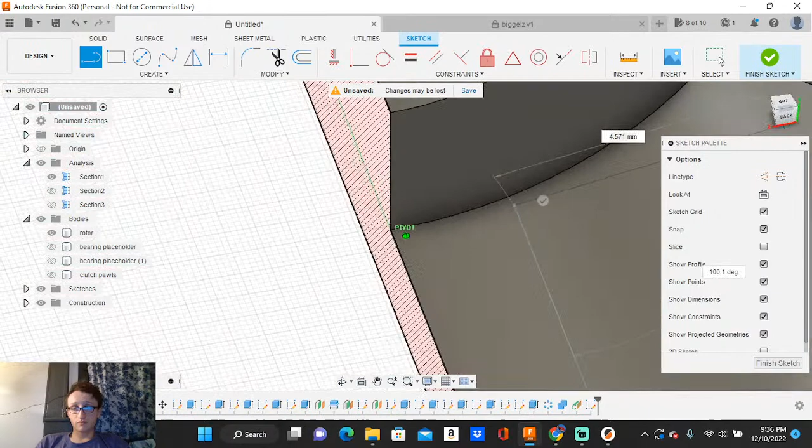Okay, so I want to keep this at 90 degrees. You get about 3 millimeters wide, and then go all the way back up to the front. Okay, just like that. And then close it off. So now I should be able to pull this.

Should be able to pull this inside. Let me add that clutch section again so I can see where it's at. Ooh, too close, too close, too close. Like that. Are we even centered anymore? That looks off-center. That looks really off-center.

It is off-center. Come on, man. That should still be enough to get grabbed by this clutch. So I don't want to cut, I want to join.

Actually, you know what? New body, actually. Let's make it a new body so I can move it. Yeah, let's make it a new body so I can take this and scoot it where it's supposed to be, like that. Silly little thing Fusion can be. Fusion can be really, really stupid sometimes. But that's pretty much what I wanted to do with it.

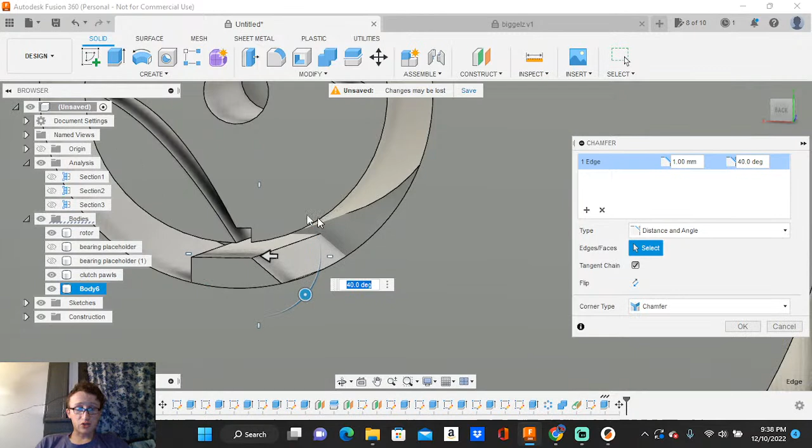And then I want to get rid of this angle right here, this edge. I want to kind of shave that down a little bit. Okay, cool. Oh, it remembers distance and angle. I want to shave that down a little bit so that if, for whatever reason, the actual pawl that's on the clutch gets stuck out, as the rotor continues to kind of freewheel and come around, it'll actually just ride up on that ramp and get knocked back in the center again.

So we got one right there, and now I should be able to just combine this with the rotor and not the pawl, and I should be able to combine it just like that. So now it's all one part, and now I can come back in, do a circular pattern again. Yeah, circular pattern again, features, and around this axis.

And it really wants to put in 3 every single time. I don't know why. But we might as well do a little bit extra duty here and just do 4. Might as well just do 4. And it didn't model that edge. Why didn't you model that edge? And the wires did not line up?

No. Okay, let's do faces then instead. That's stupid, I hate when it does that. Fusion can be a real hassle sometimes, I will admit, because sometimes it just really doesn't want to listen to you.

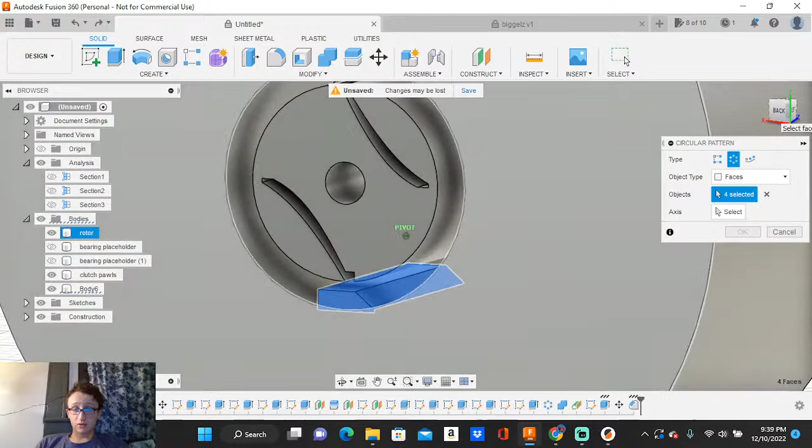So let's just do faces, since it usually pretty much always gets faces. Yeah, 4 selected, and it's not selecting the back one because it shouldn't have to—there's nothing there, right? Okay, wait, it's inside that portion. That should be good now. So I've selected that around this axis. Let's do 4—will it do all 4 of them, or will it actually keep that edge? Okay, cool.

Fusion, you're so stupid sometimes. I don't know why it doesn't want to capture this. I just want to clone you, please. Actually, can I undo it being a body? It is, okay, so it's still a body in here—so it's still its own individual thing, in this save.

So let's move the body over like that. We'll keep it its own individual body for right now until I make a clone of it. Then go back here and do what I just did again, because Fusion wanted to be difficult, and now you don't want to play nice. There we go—does that work? Does that work? That works. Yeah, that works, okay, that works.

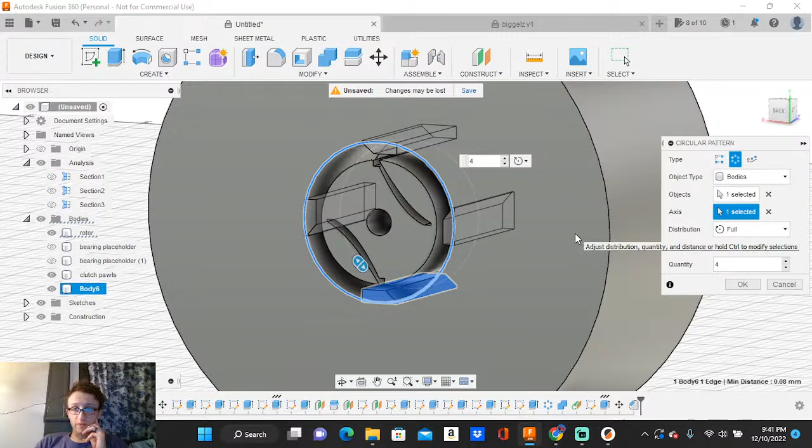Now do pattern, and since it's its own individual thing, it should be able to find it no problem—bodies. Axis, this axis, 4 of them please. Now, do I want to do 4, or should I just do 2? I might want to do just 2, because I want to make sure these pawls have enough space to actually open up, ride along this outer edge, and then hit the wall of the pawl—or the stub, whatever—to get spinning. Okay, that's a pretty tight tolerance, but I think that'll work.

Okay, now I've got to combine these. So all 3 of those are combined, and there we go—that should functionally be the clutch. That should work. Yeah, so that's the clutch, pretty much, I think. I think that's pretty good.

Of course, time will tell if it actually works—I'll have to do some prototyping and see if it's going to work. One of the things I don't like about this is I might just have to scale the siren up, because of how small it is. It's probably just way too small to be trying to do this thing at this scale.

One of the things concerning me from an engineering standpoint is that all of the weight of this entire rotor is being held by this little pin, and this little pin is plastic, mind you. So if this thing gets dropped or bounced, it could very easily shear this plastic right off there because there's layer lines there. There's an inherent weakness with how it's constructed—it could shear that plastic pin off, and then the whole rotor would basically just be loose on this and wouldn't actually be held off of the clutch itself.

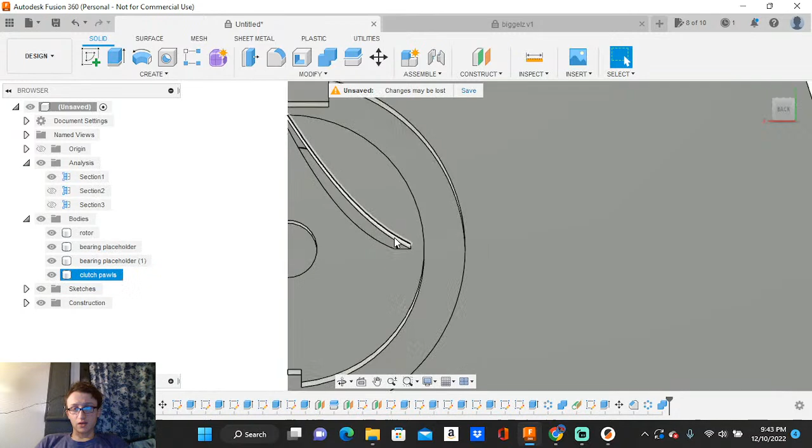Another engineering concern is that this little edge right here that's actually holding on this whole pawl, this weight—I'm concerned that over however many cycles that will end up snapping, and then it would render that siren useless, or it wouldn't work properly because it would just be freewheeling all the time. So that's a concern of mine too.

Generally, I'm just concerned about all that weight being transferred on that when this thing starts. This thing is going to have a very high moment of inertia initially, because of how heavy I've purposely made this rotor, so that once this motor gets spinning and these pawls finally open up enough to engage with the teeth on the rotor, I don't want it to just slam into the rotor and risk snapping this right here. It's another thing I'm concerned about—so there's a lot of things to consider on this.

I'm not entirely sure how it's going to work. I guess this is part of prototyping, so we'll see if it works. If it doesn't, I can always engineer something else and do something else. But yeah, I guess this is kind of what we have right now for the clutch. More videos will follow as we go on. But yeah, what else we got in the chat?

That's cool. My favorite is the SD10, the older 500. So you're a fan of the older 500 specifically. You're not referring to the 500 SHTT like that, right? The Ray 2009.

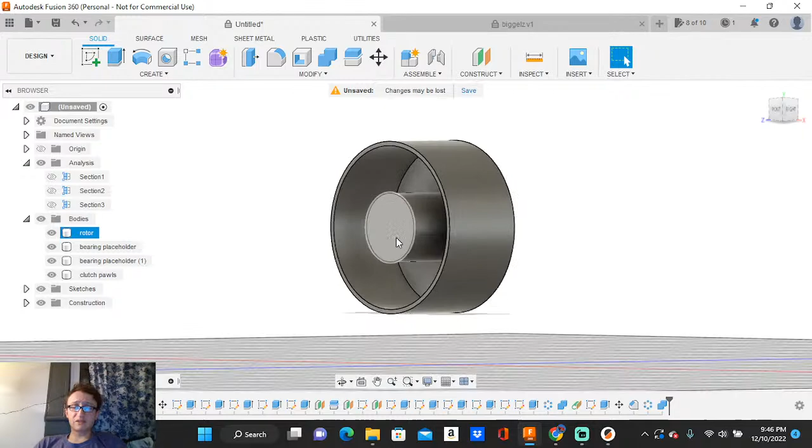I'm listening to your stream like a podcast, playing my game. It's interesting. Thanks, Abel. Yeah, that's pretty much what I intend for my streams to be viewed as, not necessarily to be sitting down just watching it, unless you're really interested and want to see what I'm doing. I do have another stream I use pretty much just for teaching, but basically just listening to me ramble in the background is kind of a fun thing to do, so I hope you guys enjoy.

I think this would be a pretty good little test rig to see kind of how it works.

Again, I am concerned about this clutch snapping, and I don't like how close this edge is to the outer edge of this rotor, to the center of the clutch. It's half a mil. That's really, really close. Man, that's close, that is really close.

Which is a plus, because that means the pawls themselves and the clutch don't have to spread out very far in order to catch the edge of the dog on the rotor. So yeah, that's gonna be really close, really tight, but we'll see if that actually works.

I'll probably see what this is going to look like when I print. Let's get rid of the rotor first so I can see what's going on.

Clutch pawls is its own entity. Is it combined on this part? I don't think it was in this model. Go back and delete this. Yes, remove it, thank you. Okay, so let's update that again.

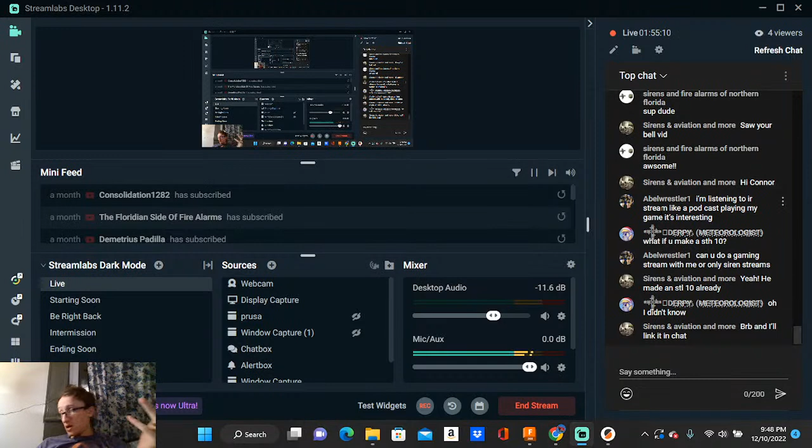As I said earlier in the stream, I do plan on making an STH10 at some point because I've already made the STL10. So if you're not a subscriber or you haven't seen the video, I've already made an STL10. An STH10 is at some point coming down the pipeline.

Can you do a gaming stream with me, or only siren streams? I probably can do a gaming stream, but I don't think many people will watch it because most of my channel is pretty much sirens only. But yeah, I definitely probably could.

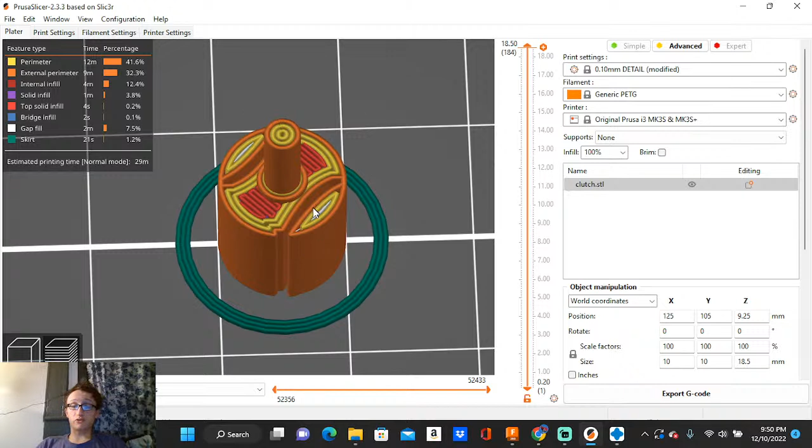So I don't have to sit there and make sure it's not going to vibrate itself to pieces. But the problem with regular printed stuff on the traditional printer is that I've found they tend to be a little off balance, especially for the really small stuff. Maybe not so much once it gets bigger, then it's a bit more uniform and the little inconsistencies don't matter. But at the really small scale, balance is really important, and it ends up being kind of a pain.

I also have to consider I don't want this wall to be so small that once I press this onto the motor shaft, it ends up splitting because I'm forcing it onto this motor. I think this motor is actually damaged. But yeah, we'll see what we can do with that.

I'm going to print these up today or tonight and see if this is going to work. You might see that in a short coming up on the channel once it's done printing, because it's going to take about a half hour to print this kind of stuff. I'm going to print it on both the MSLA and the FDM, so we'll see which one is better. The FDM is going to take significantly longer, at least 10 minutes longer, and we'll see which one's better.

But let's go ahead and get back into it. We'll finish working on the rest of the model. So we kind of have this now. Now it's time to start on the actual rotor itself. Let's get to the rotor. We're gonna make the other stuff invisible because we're not working on that now. So now let's get into the actual modeling.

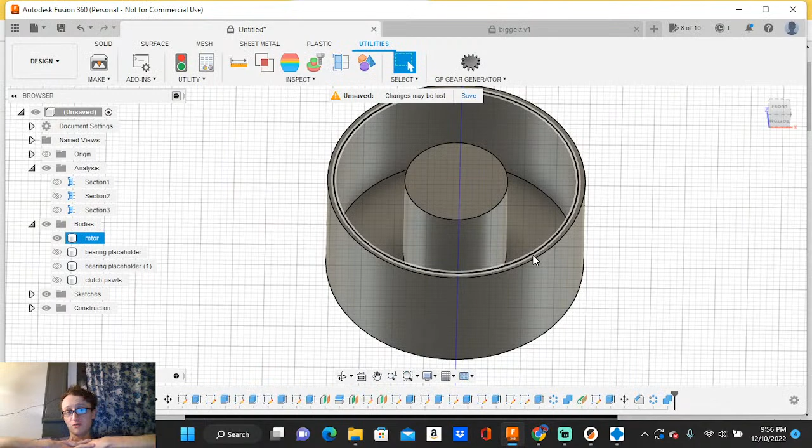Yeah lady, yeah lady, you guys have probably seen her in my previous video I just did recently, but here's my cat. For those wondering what her name is, it's Lady. She's flea-ridden now - we found a couple fleas on her today, so we gave her a flea bath, so she's all nice and clean. Ooh, you smell good, you smell like a cat. Now she's gonna sit here on my lap. What are you doing, honey? Yeah, that's my cat, that's one of my cats. I actually have 3 cats.

But anyway, let's get back to the task at hand, and that is cutting the ports in this rotor. I'm not going to bother the stator - stator's really easy stuff, that's not going to take that long at all. But the ports are another story.

Did you hear her wheeze when you picked her up? My cat is so fat, so she wheezes when you move her.

So let's go construct - we're going to construct a tangent plane because we're working off this round thing. What did I just do that for? Okay, so we're going to do that. Come here, now we can sketch.

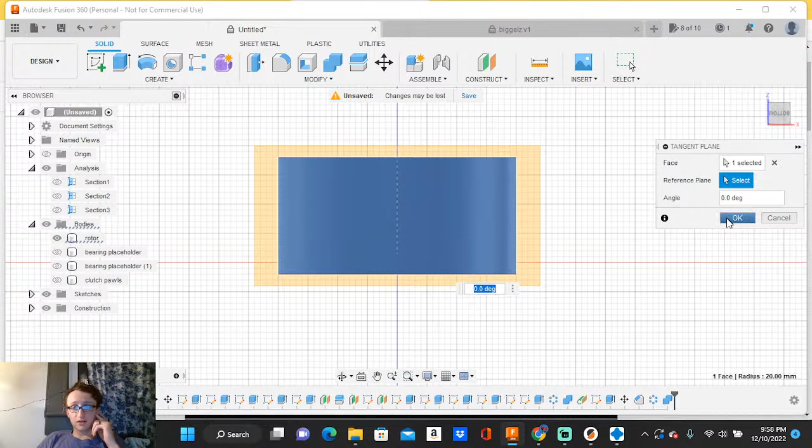My voice is doing it again. Like I said, I've been talking for so long, guys, my voice is like...

So again, we're going to start construction on this, let's get these ports cut. No, why did I make it a circle? I'm a moron, go here - rectangle, 3-point rectangle. I like using 3-point rectangles because it allows you to make them a bit easier, the ports.

I'm going to set up some guiding lines here really quick. So I'm going to make each port about 4 millimeters, which is not super big, but they don't have to be super big.

She is so whiny, my cat is not happy that she got a flea bath today, so she is just crying. Stop having fleas then, yeah, stop getting fleas, cat. Which is odd because she doesn't even go outside, she's inside all the time, so we don't really know where she got them from.

We're gonna make this port. This is 2 millimeters, 2 millimeters from the bottom, I think, if I made this right. Yeah, I think it's like 2 millimeters from the bottom, so let's do that.

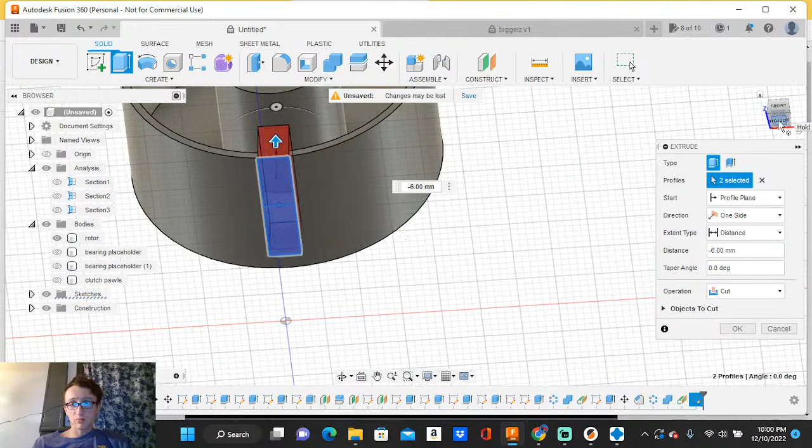Now I've got 1 port. So now I should be able to just pull like that - that'll cut 1 port. Am I right on the bottom? I might have cut it too deep. No, I didn't, cool, I cut it like perfectly.

Oh, 10 o'clock, 10 o'clock for me here, so it's getting late for everyone else too. But luckily it's the weekend, so hopefully no one else has got anything else going on.

So we're going to cut that 1 port there - that cuts nice and clean. Look at that, I'm actually a little bit off the bottom, let's go back in and clean that up a little bit. Make that a bit closer, make it flush, try to make it as flush as possible. So I'm going to leave that - now I've got 1 port. I know it's open at the top, I'm doing that purposefully, trust me.

I have good reason for doing that, mostly because of the way I'm going to be printing this rotor. I want to leave it open up there so it doesn't have to try to bridge that. It'll save me a lot of headache later on.

So now I've got one port there, let's go create another circular pattern. We'll take that feature and do the same thing again, rotate around an axis. So we've got 3, if we want to make it a German siren, make it a 3-port. Let's do 16 ports, let's see what that looks like.

Yikes, that's gonna be real weird. You sure it's 16 ports? Am I being punked right now? I don't think it's 16, it actually might be less than that. That looks like a lot of ports. I can't believe I don't remember how many ports a Q has.

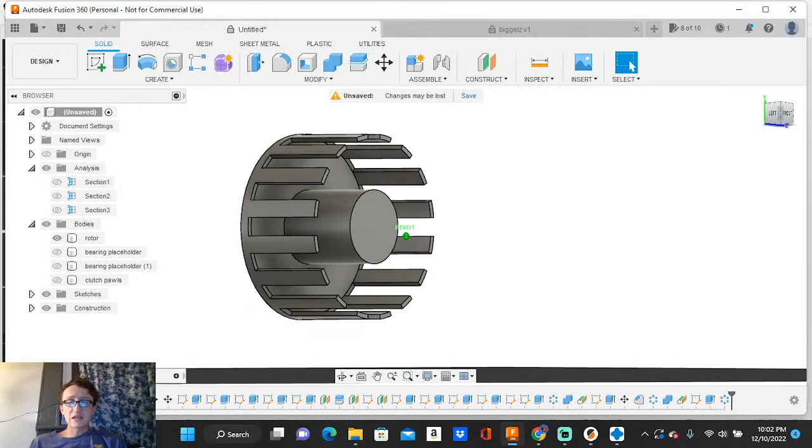And it's a DC driven siren, so you can't really go off of motor RPM and the tone to figure out how many ports it is, because the motor speed for the siren is different. I don't know how fast the DC motor goes.

Oh okay, we're putting flea medicine on my cat right now. I was trying to figure out what my wife was pantomiming towards me. But that's a lot of ports.

Okay, so now it's time to draw the fan, the actual blade shape.

I have to give credit to Federal on this one for actually making the Q have a directional rotor, which is one of the only sirens they've made that actually had directional rotors on it, which is really cool. The Q was really one of the first sirens I've ever seen that Federal made that actually had a directional rotor on it. Good on them.

I mean, B&M was doing it a long time ago before that, but we're not going to talk about that. Bless you.

And on this Q, it spins counterclockwise, but on this one, because I know which direction my motor's going to be spinning, we're going to be spinning clockwise.

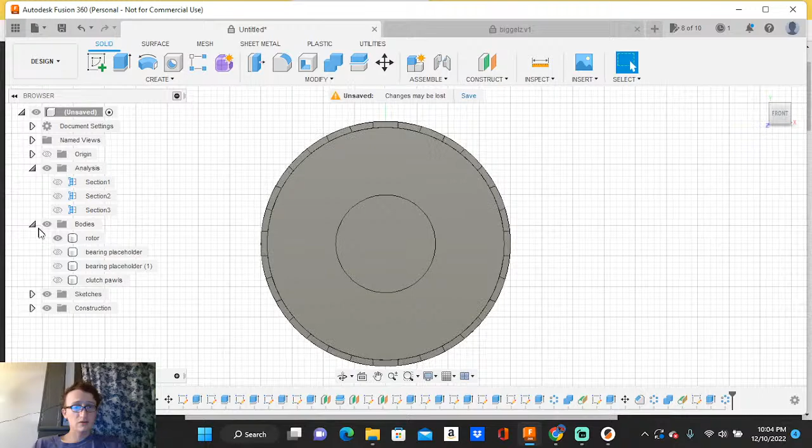I'm not telling anyone what it is because I want it to be kind of a surprise, but I'm working on another siren besides this. Let's just say that it's a fan.

I wonder. I'm just screwing with you guys now at this point. I'm just excited about it. I don't know, I'm just excited.

So now let's go ahead and start drawing the fan, or the actual blades of the impeller, the rotor. Excuse me, where is... I just gotta make a sketch. There we go, fit point spline.

Once I do it once, I should be able to do it again. Pretty easy. Okay, so we're gonna come off of this edge and about right there, and then we're gonna start bending down to about right here, I think.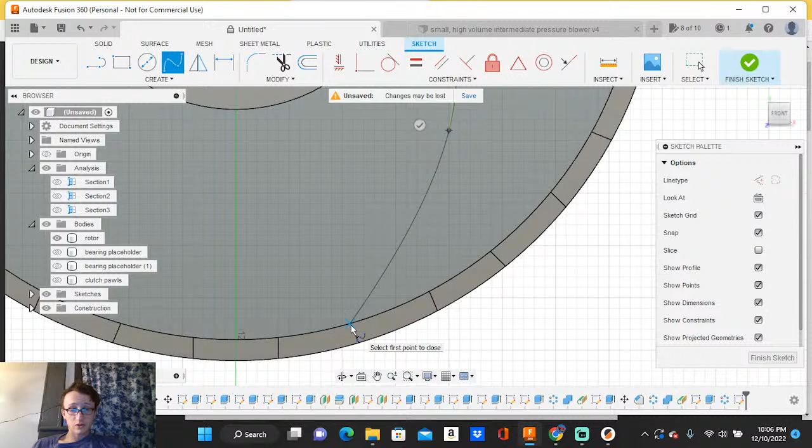I love the Q's rotor design, it's just a really pretty looking rotor. Okay.

And we'll do another fit point spline on this edge, if we can find it. There we go. To about right there, there.

That's gonna be a thick freaking vane, I don't want to make it that thick. Let's go from right there. Okay, make it a little bit thinner than that. It does not need to be that thick. Okay.

My wife is putting flea medication on my cat right now.

Okay, and there's one vane which is a bit thicker than I kind of want it to be. But we'll see what this looks like once I put a whole bunch of them in there. Yeah, it's a little bit thicker than I want it to be. Lady, hush.

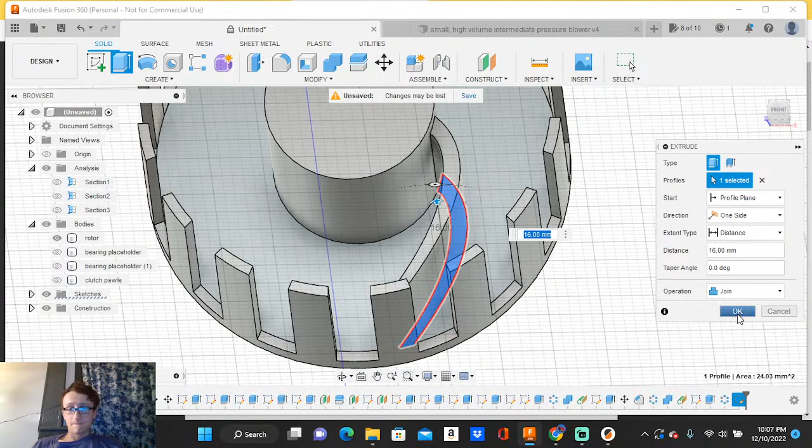You can probably hear my cat kind of quietly complaining in the background.

Let's make this a new body so I can just have one of them right there so I can move it. Let's try making a pattern. Let's see what it looks like. 16 of them.

Oh wow, that looks weird. That looks so weird. And I also made it go in the wrong direction because I am an idiot. I forgot again, this rotor spins clockwise, not counterclockwise. But that's what it would look like, kind of. Yeah, I mean this is really thin, but again, I want to make this rotor kind of heavy. The one problem is I have to make it heavy, and I have to make these vanes thick enough that the printer can actually print them. But I also have to make sure that there's not so much space taken up by vanes that it can't actually pull any air through it.

So there's a lot of things I have to consider when I'm doing this. I know it's probably 7 o'clock now in most places, well 7:08 because I'm going on a little late. But I'm going to read a little bit more of the chat really quickly.

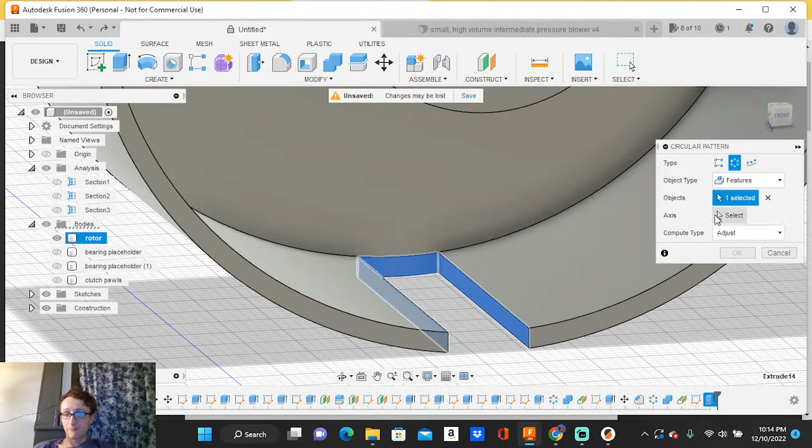Alright, so let's kind of continue on. I had a feeling it was 14 ports and not 16, but I listened to the chat. What can I say? Well, it's also kind of my fault for not just knowing this by heart, I should just know that. Yeah, 14 ports. Okay, that makes more sense. Yeah, that makes a lot more sense. Yeah, you're right, it's definitely 14. It is definitely 14 ports. I don't know what I was thinking.

Alright, so let's make that spline, or that fit point spline again, so that makes those little legs, those little things right here. I gotta make sure I spin the right direction, I keep messing myself up trying to go somewhere else. I'm just so used to drawing these splines off of this edge going down that I'm just so accustomed to it now.

Put one right there, and we'll gently... nah, it's too far out, bring it in a little bit. Put one right there, and we'll put it right against that edge.

Man, I'm still thinking to myself, like that's crazy, we had Tyler in here. We had Tyler in the chat, the OG. That's just really cool, I am flattered that I had Tyler in the chat.

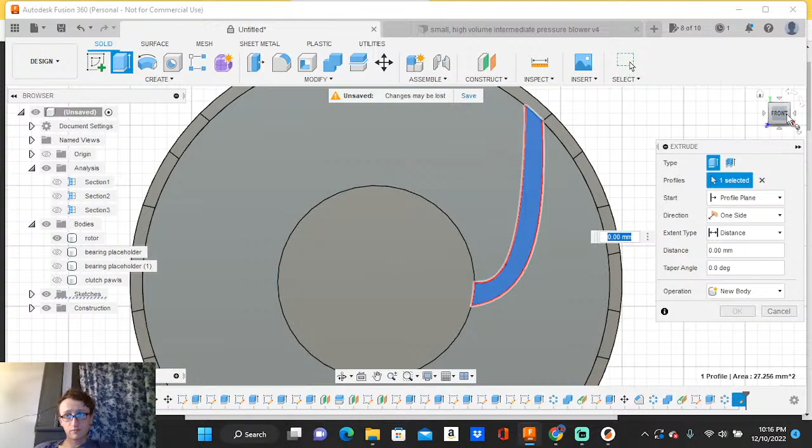Alright, let's see kind of what that looks like. Okay, we'll extrude that a little bit. The Qs, yeah, it's got a little bit of a divot in the center.

Okay, I didn't even consider that. I didn't even consider that, I might have to make that in just a second. Let me first make all these line up and see kind of what this looks like, and then I have to make the rest of this to make it look accurate. Let's see how that looks, how does that look?

It's not pretty, it's not pretty at all, but we're getting there. This curve is just so smooth on this, I would love to get that looking correct. It's done just so smooth though. Yeah, let's back that up. That doesn't... I'm just not super thrilled with how that came out. This is a lot of what you end up doing in Fusion, a lot of little tiny things trying to just get it perfect.

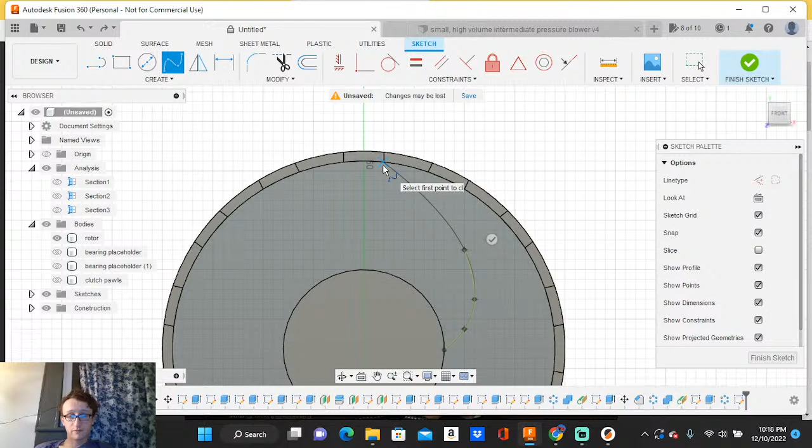No, another one, I'm gonna do like right there. Then another one. Then another one. That looks better, that looks a lot better. Okay, finish that.

Focused. Sorry guys, just being quiet because I'm trying to pay attention to this right now. I'm not usually used to modeling these with an audience, I must say, so you'll have to excuse me.

Okay, that looks pretty good. Make sure it goes all the way to that top edge. There we go. Don't want to join it, make it a new body.

That is nowhere near lined up correctly. Let me rotate this just really quickly. Yeah, that was my fault. It should be lined up like that.

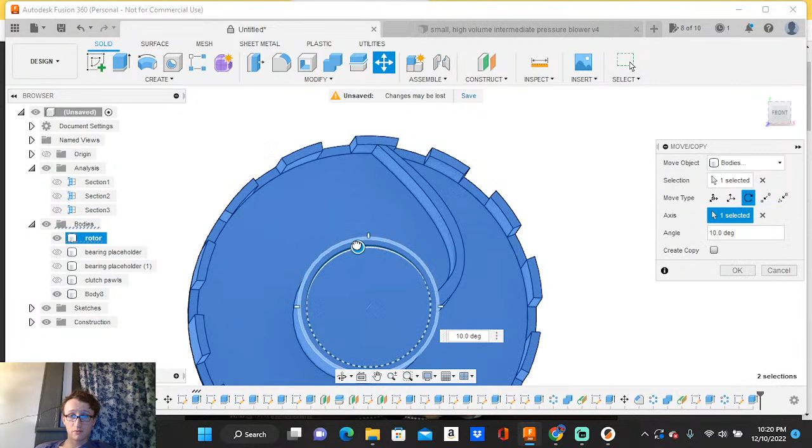15 degrees, 14 degrees, nope 13, there we go, 13 and a half. Does that clean up that edge? Does that edge line up? Oh my gosh, 13.8, 13.7, 13.6, 13.7. That's perfect right there, okay.

So now we can go in, pattern, do this around this axis 14 times. Okay, now we're getting closer, now we're getting closer. And then now we get rid of the rotor.

Because now we have to make that little dish shape that's kind of on the Q, on all these vanes. So we'll go to the chamfer tool. I probably should have done it on just one of them. Let's do that first, let's do it to just one blade actually first.

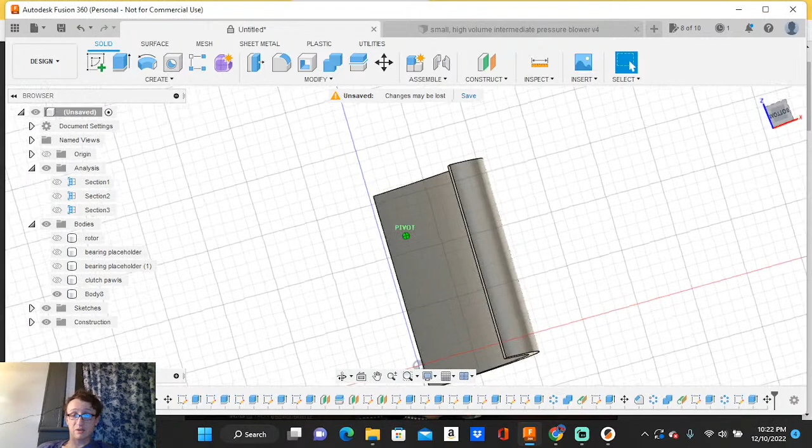So we'll get rid of the rotor. This is something you guys are gonna like, because you're gonna see it's gonna make a really funky shape. So here's that one little vane out of the Q.

So we'll go to fillet. This will allow us to make this really wicked little smooth curve on the top. You can see just like that. So the Q is pretty got a pretty wicked little curve going on.

If I can make this tangency weight just a little heavier - I don't know, a little lighter actually. So we're going to do like say 0.8, 0.5, 0.4, let's try that. Yeah, I'd say 0.4. 0.4 looks pretty good.

Okay, bring the rotor back. Okay, so now we're getting more of that smooth transition up toward the actual edge of the blade.

So now that we have that really complex little edge done, now we can go back in here and make this circular pattern. I'm not selecting a feature, I want to select the body. There we go, axis there, 14.

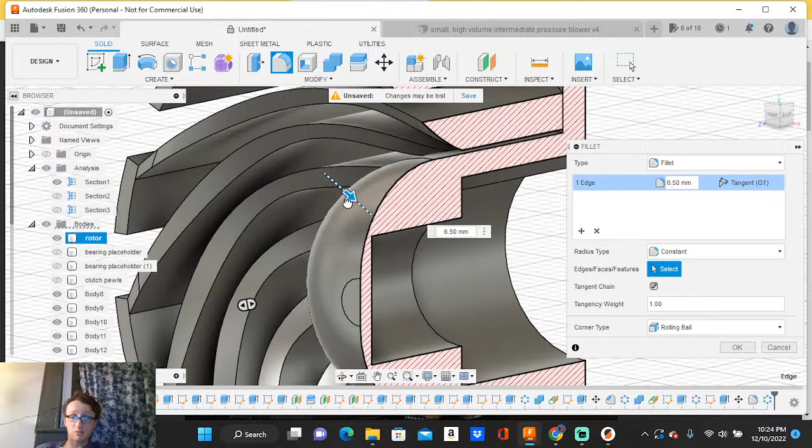But I could do something probably like that. I mean that kind of works. I could do that, I'll do that. That looks pretty good, so there we go. There's kind of our version of the Q's rotor.

Of course, again, spinning in the other direction, and they don't have the actual top little ring going around it, which I have to add because it's not gonna work right if I don't have that ring. But that's it so far, so that's kind of what we got. I will definitely spend some more time.

Oh, did I lose internet? Hope not, hope it didn't kill Streamlabs.

How would you guys rate an MS390 120 volt, 1 out of 10? Me personally, I'm not a super big fan of...

the Chinese style sirens. I don't like that they use universal motors. I wish they just used regular induction motors, because I think they would sound so much cooler, because they actually would have that distinct wind up, and then they would reach pitch and they'd stay there.

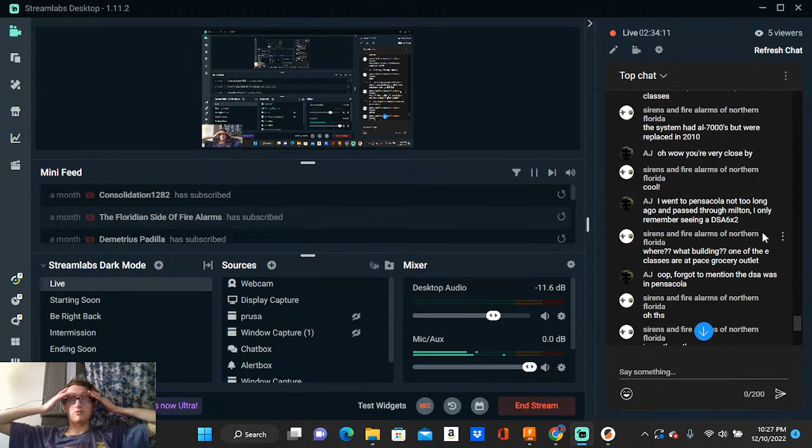There's a lot of interesting sirens around here. It kind of sucks because the only stuff I've found, at least you guys are talking about Georgia and Pensacola, Florida, but the stuff around here, since I live in Columbia, South Carolina—really all that I've found that we have is a couple of DSAs out by the river. I actually heard one of them doing a silent test recently. You could walk up and hear the radio, the tones come in. I could hear the radio, but that's pretty much all I have near me. And then there's a 2001 130 DC, also by the river as well.

That's used for high water, it's a high water alarm. Let's see if I actually have the video of what the tone sounded like. It was kind of cool listening to the tones come in. Where is it? Yeah, here it is. But yeah, those were the DSAs by the river. I think they were either actively testing, because it was around test time—it was like 12 something, or a little bit after 1. So they might have been trying to test, and honestly I wouldn't be surprised if the drivers are just dead on them, since they've been out there a long time as far as I know.

A USB siren that will have a long coast—definitely buying. Yeah, that's the whole intention, that's kind of what I'm trying to do, at least.

I never really studied the Q, how many ports is it? I'm assuming 12, but I think we've pretty much deduced it's probably 14 port. I thought it was 13 port, looking at the rotor here and the way the vanes are set up. I wish I could zoom in, but the viewport is such a pain to work with. I think the way they did this is that inside this port, those vanes create the wall channeling into the port itself, and then it goes down and opens up to the port right here.

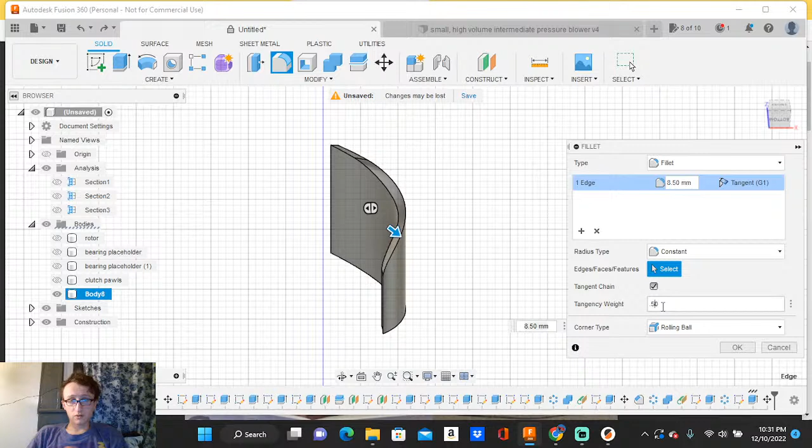That's pretty good. Yeah, let's keep it there like that. So 0.1 seems like quite a bit. Let's do 5 like it was—no, 1 just looks better. Yeah, okay, so just 1.

Okie dokie, so now I can go back again. I keep changing things, I like fiddling with it and making it as close to perfect as I possibly can, even as a prototype, just because it saves me time in the long run—I don't have to go back and fix it again to make it look perfect. I can just do it here the first time, it saves a whole bunch. Let's clean up that edge again.

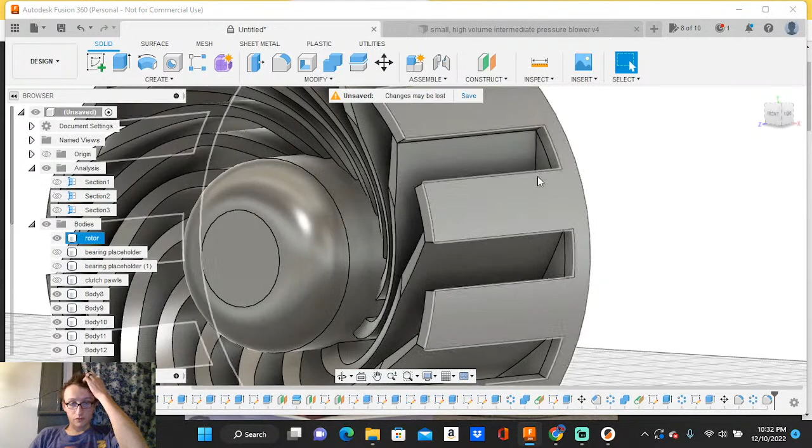Yeah, that looks pretty good, that should be pretty good just like that. Alright, okay, so now it extends in quite a bit too, so now I should be able to come—oh, I have to modify, I have to connect all this really quickly. I haven't saved any of this, I haven't saved this entire time.

I just realized I haven't saved any of this. So we'll save this really quick while I still have internet, because I don't want internet to just die all of a sudden. And we can drive now?

Sweet, that was not there before. Now I can combine all of these. Actually, you know what I can do? Cheat, just highlight the whole thing.

Oh no, oh, I thought it crashed Fusion for a second. I was about to have a heart attack. Please, there we go, sweet.

Alrighty, so there's the rotor for the Q. Chonky, dude. A very chonky looking thing.

And we'll go in here, go to sketch so I can create another circle. Center circle right there, all the way out to the edge. And then come in to right there. Now I should be able to come here. Press pull all of that to make that a little bit thicker. Let's go up 1 millimeter.

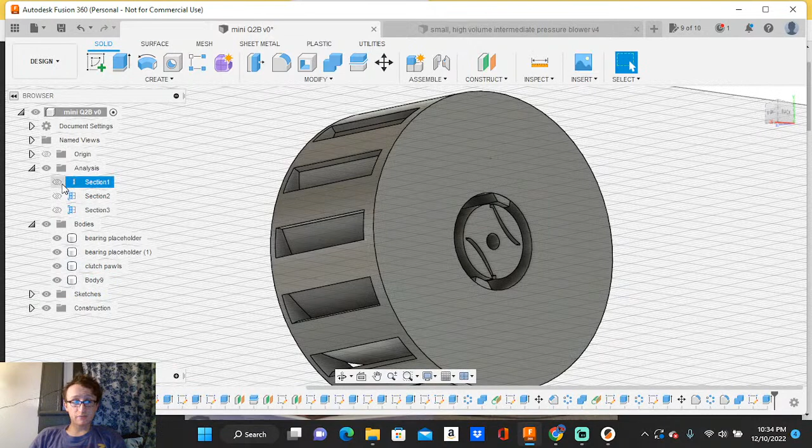For my little version of the clutch, at least, I'd be really curious for it to work correctly. And I did purposefully make this back section right here, this back base that the whole rotor is kind of constructed around, pretty thick so that if this clutch holds up like I hope it does, I can add a weight to the rotor too, to make the rotor heavier so it can wind down even longer.

But again, it all depends on if it's actually going to work or not, it all depends on this clutch actually functioning properly. So that's pretty much about it for today, guys. It's been going on 3 hours now, so it's been a really long stream, but I appreciate everyone for coming in and joining.

Sorry for coughing so much. Again, my throat is so dry.

But yeah, I hope everyone enjoyed the stream, kind of got to tool around and see what I was working on. But if this all works properly, I will definitely have a YouTube short, or probably even a longer format video going through to see how it ended up working out.